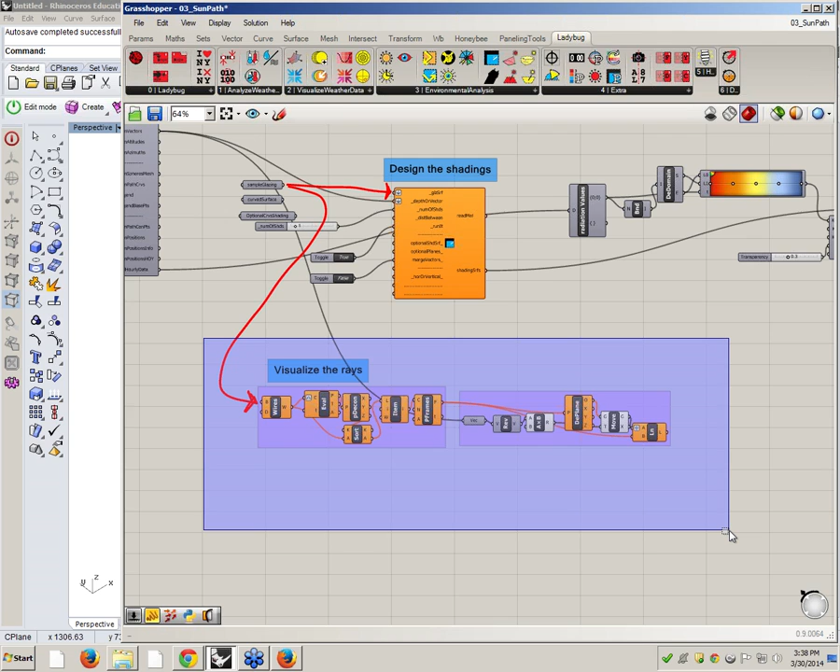Let's talk a little bit more about SunPath. So what I realize actually now is this thing is previewed on. Select all these visualize the rays, all these components here. Is everybody following? If you couldn't do it, that's fine. We will do it together, and then you will have another one to do.

So select all this, right click, and preview off. Right click, preview off. And don't right click on one of the components, it will just preview off for that component. So when you select, just right click somewhere on the canvas.

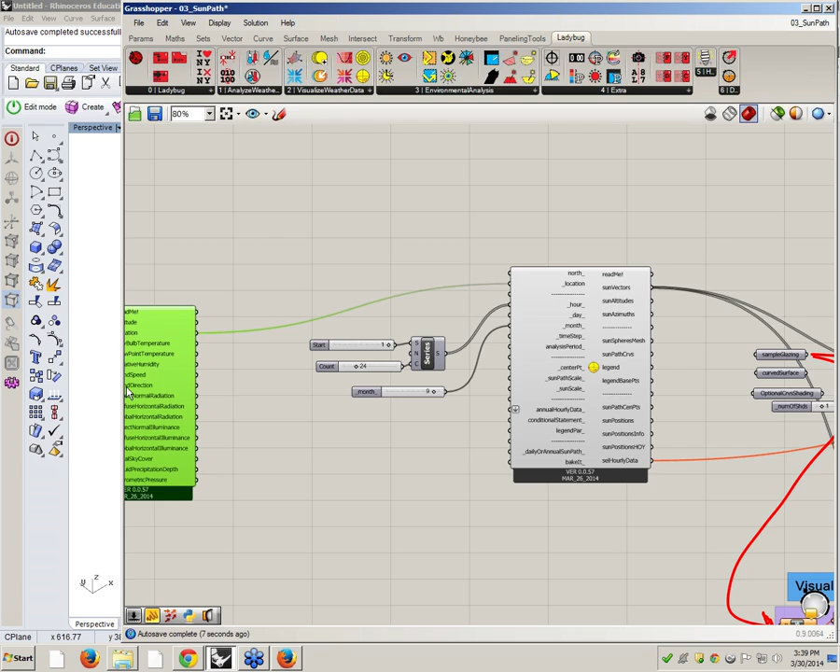So let me go and select my weather file, set one file. Where should I go this time? NREL. Okay, so I have the weather data. I disconnect this for now. So first of all, I want to see what I have. I right click here and I preview on. I turn on the preview for the SunPath. There should be a SunPath somewhere.

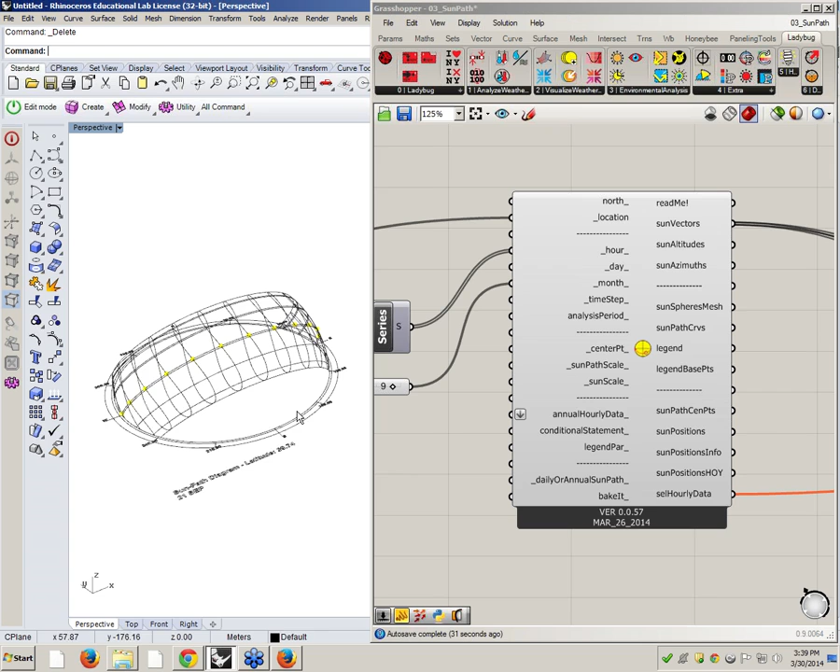I right click, I click the middle click and then I do zoom. And for some reason it doesn't work here, which it should. So now I can see my SunPath. Let's talk about SunPath. So this is an annual SunPath I have here, which basically means every line is for a single hour, and these lines are the 21st of different months.

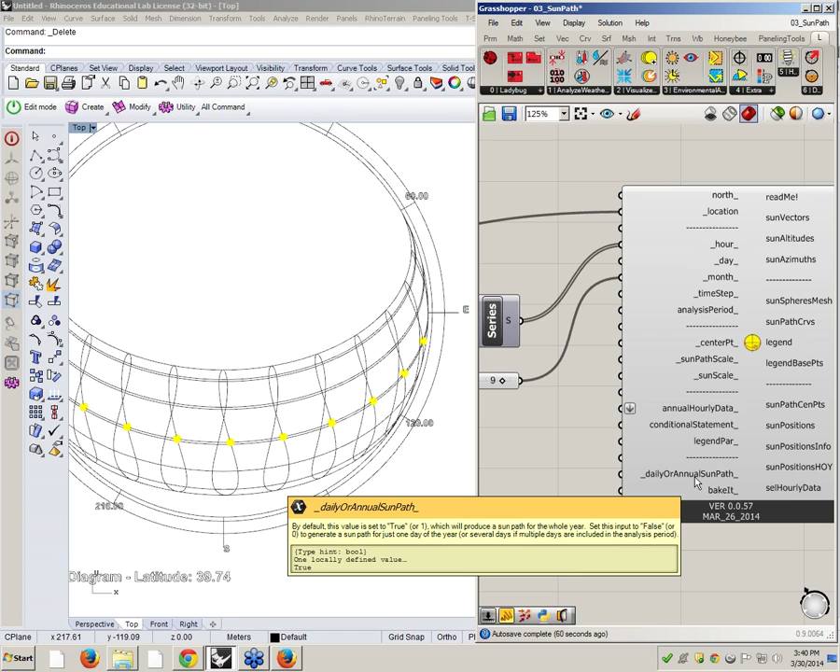If you want, there is an input here for daily or annual SunPath. When you set this to true, which I think is the default, it shows you the annual. But if you set this to false, if you bring a Boolean toggle, let's see if it crashes, because it crashed for you, Rami, right? Okay, it doesn't. So this is a daily SunPath.

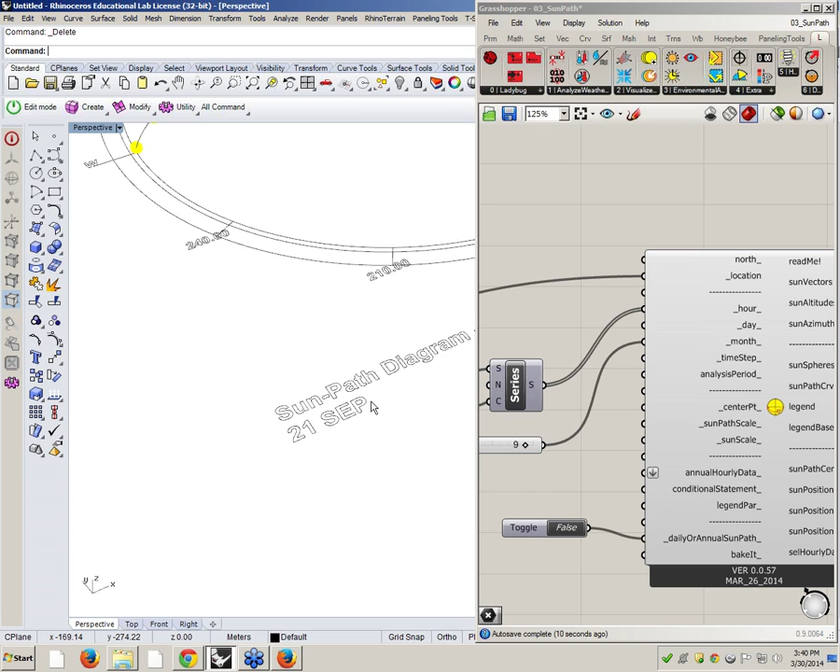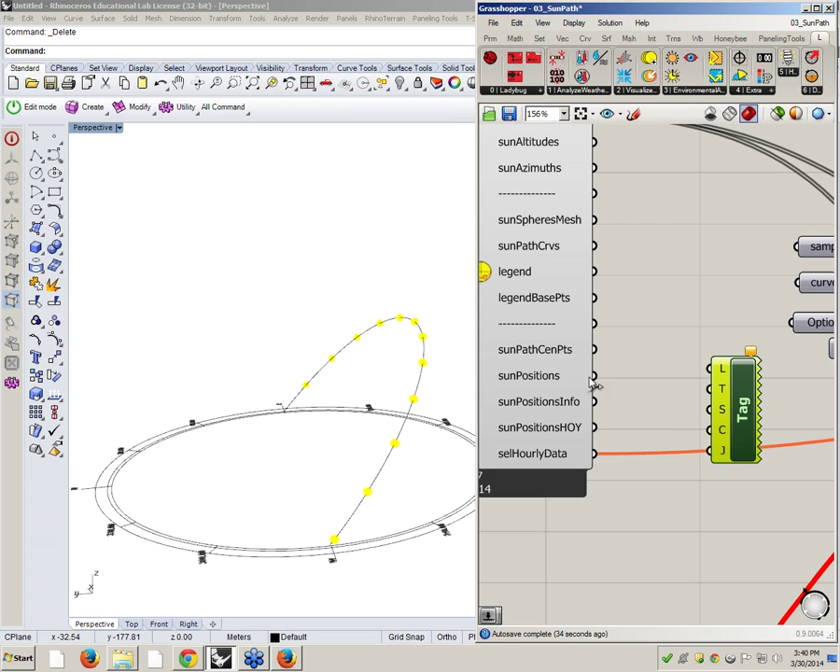This is the 21st of whatever, we should be able to read it here, 21st of September. And these are the sun positions on the 21st of September. And I already showed you how you understand which one is what. You have sun position information. So I can use this information. I can bring Tag 3D. And then I can do sun positions for the location and the information here.

And then I can't see anything because they're so small. So I just change the scale. And here we go. And I showed you how you can project this thing to camera, so we are not going to do that. So now, watch here. If I change the month, I zoom out a little bit. So for every month, it goes to the 21st of that month. You see the sun goes all the way up and then it comes down.

December. It's not like January, February, March, April, May, right? I think all designers want the SunPath actually to dance, but it doesn't. So it doesn't help you that much for randomness. It just goes all the way up, and it comes down, right?

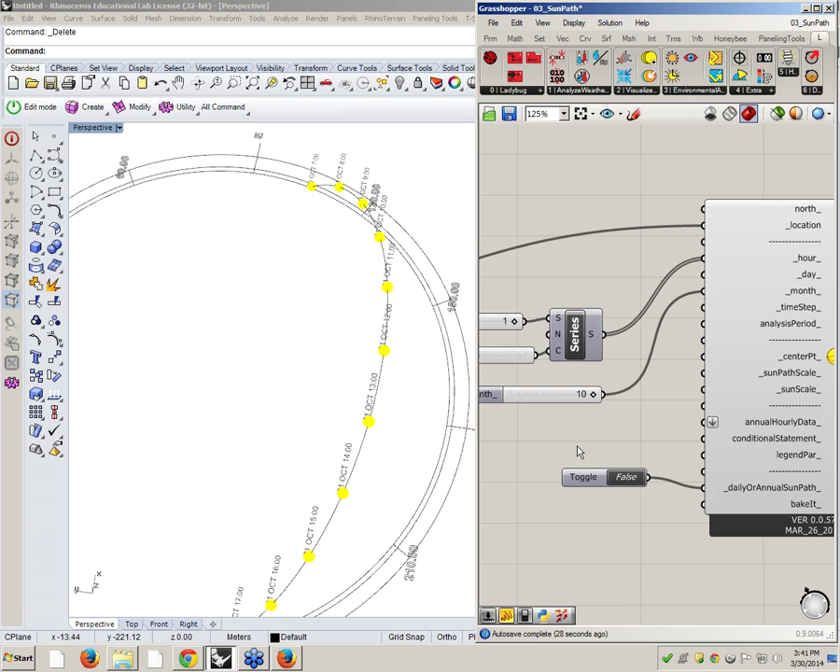So what we were seeing before, if I disconnect this, was all these days, the 21st of every month, and then these lines are representing a single hour. This represents hour 1, right? This one is hour 2, where the sun is at hour 2 for every month. So this is how you read the SunPath, first of all.

Then what I asked you to do was to generate the sun positions for all the months. Right now I have only a single month because the input for the month is only a single number, which is 10. So what we need is a series of numbers. You can bring a panel and start typing 1, 2, 3, 4, 5, 6, 7, up to 12, which is not that painful to type. But if you have 100 numbers, you don't want to do that.

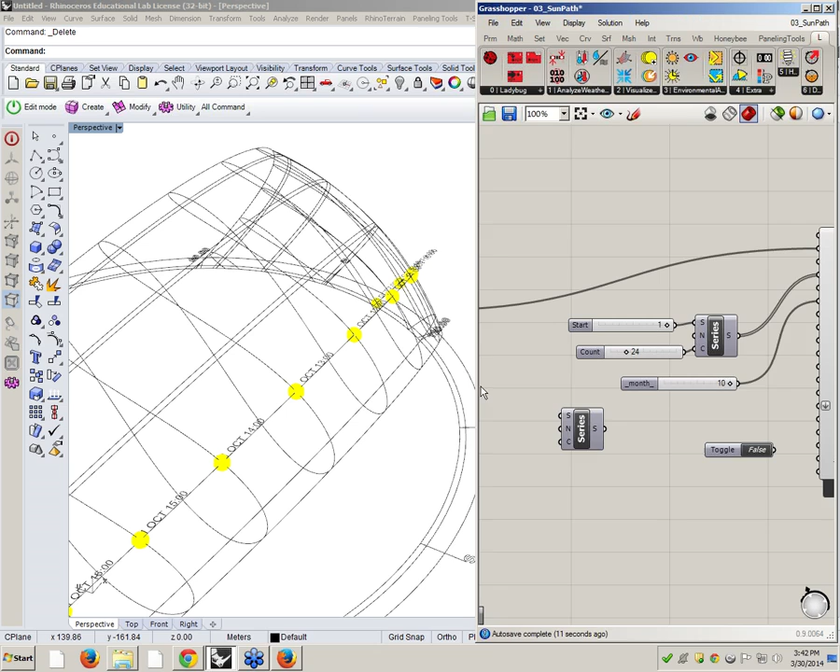So there's a component for that called Series. This component generates a series. What Series does, again, I bring a panel, I connect it here. It generates a series of numbers from the start, which is 0 in this case, with a step of 1, and for 10 values, right? 10 counts. So now I want to generate numbers from 1 to 24.

Sorry, for the month I want to generate from 1 to 12. So for the start, I want this to be 1. I just right click and type 1 here. It's totally fine if you want to make a 1 and connect it here. Just check the output, it will stay the same. Or you can bring a slider and set it to 1. No difference.

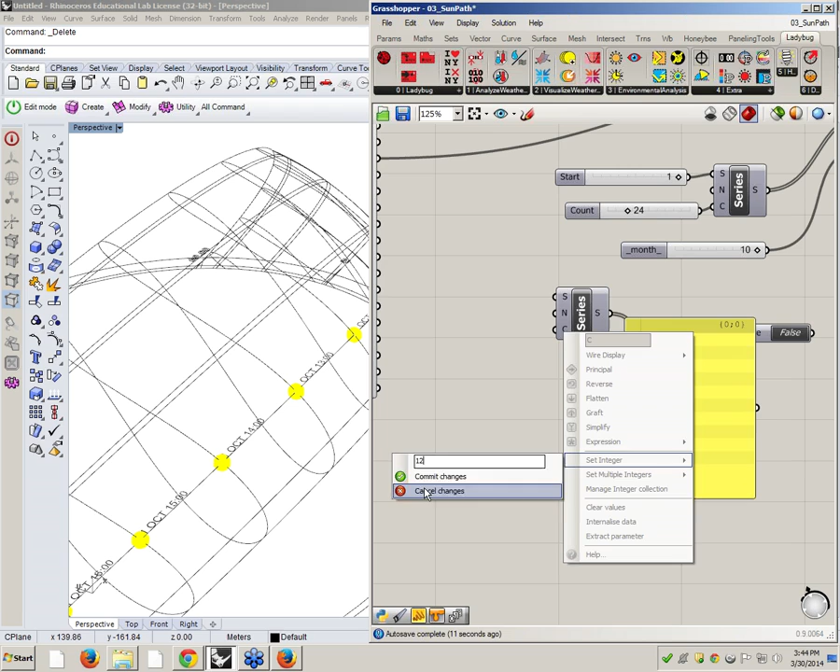So delete, delete. And then n is 1. I'm fine with that because I want it for every month. The only thing I want here is I want it for 12 months. So it gives me numbers from 1 to 12. So now if I input this as the month instead of this 10, boom, I get it for all the months.

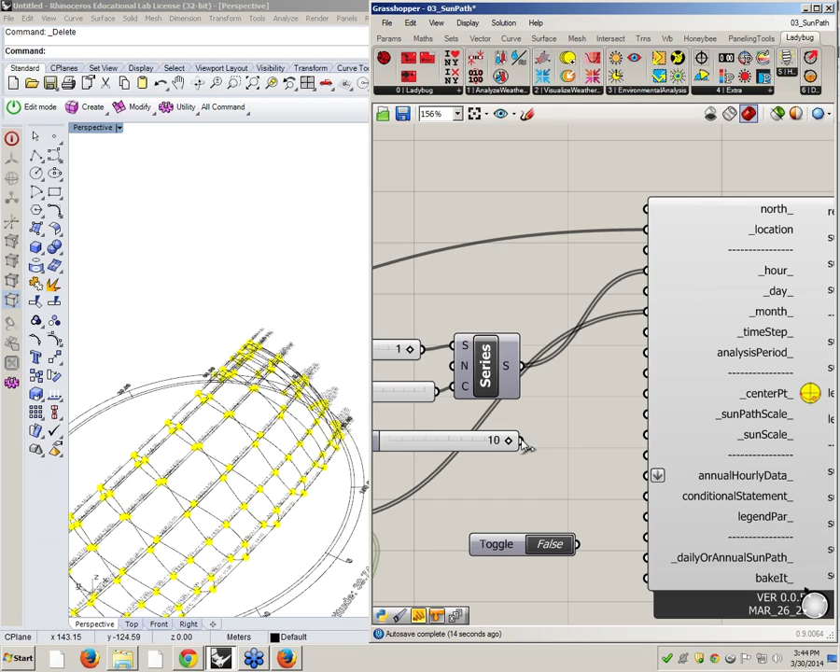Is it clear what happened? So the component goes for every hour that I ask for, and every month that I ask for, and every day that I ask for. If I just put a single hour, like 10, you will see it will show me the sun positions for this hour during the year for all the months. It's up to you, based on your problem, what do you want to get out of it. So for now, we decided to generate it for 21st of each month.

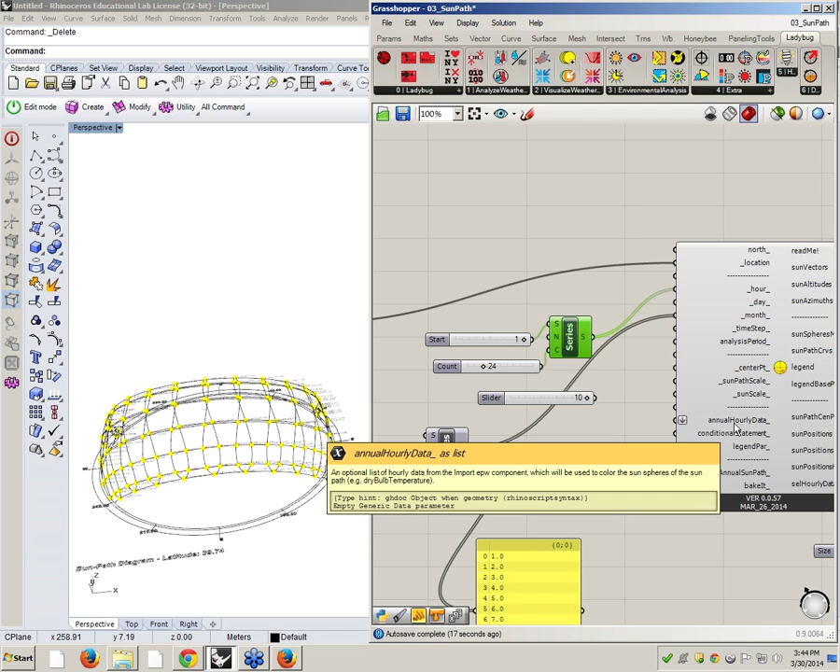And then the next thing that I asked you to do was to put the data that we need, because we want to design a shading, right? So we want temperature and radiation. You go here, you find dry bulb temperature, you just connect it here to annual hourly data, and now you get the temperature values mapped, and then you select global horizontal radiation. You have this thing mapped, and I zoom out, and I see I'll have all this data on top of the sunpath. So now if I write my conditional statement, I should be fine, right?

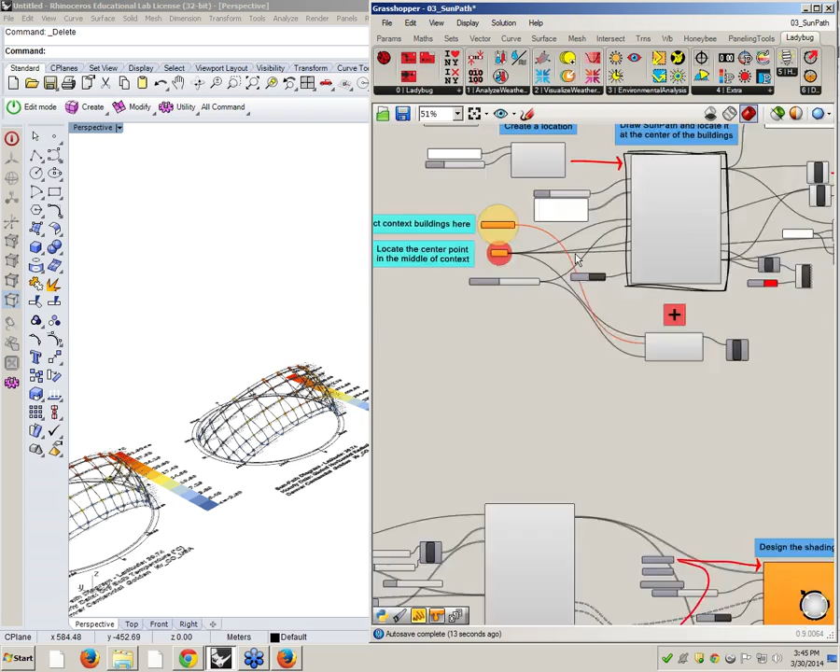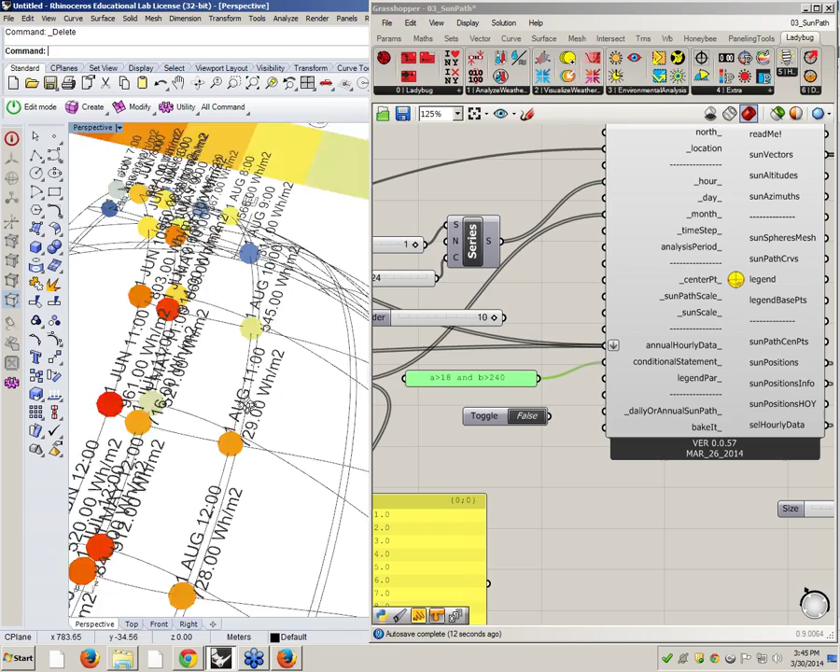So you know, now you can go and say, okay, this is the months of August, June, July, and check the average. See, okay, during the afternoon it's kind of cooler than 18. It's more than just a graph. Really, it can help you to understand what's happening in that area, just looking at the sunpath and having the data connected.

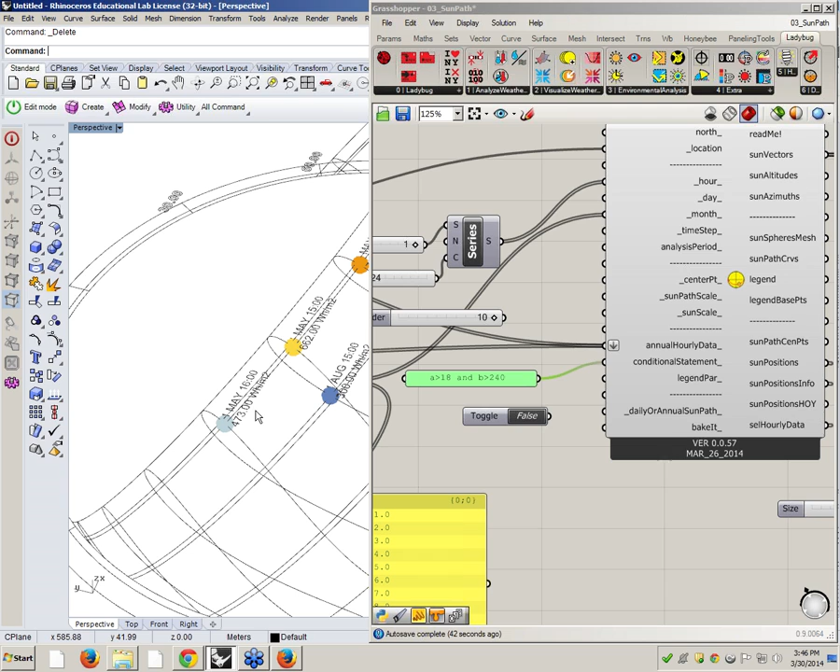At the same time, I said something that I could be 100% wrong, and nobody told me I'm wrong. I take it as because you guys are polite. But this is how easy you can read something wrong. I said A bigger than 18 and B bigger than 240. Maybe it's because of radiation and it's not because of temperature, right? Because I'm calling the values for both of these graphs, and I say A and B. So it will show me the situation when the temperature is more than 18.

Oh, I'm wrong. So it should satisfy both. I was right. Okay. Confused? Sorry. Hopefully I didn't get you guys confused. Yeah, so it satisfies both. So here we get more radiation than 240 and the temperature is more than 18. This is and, not or.

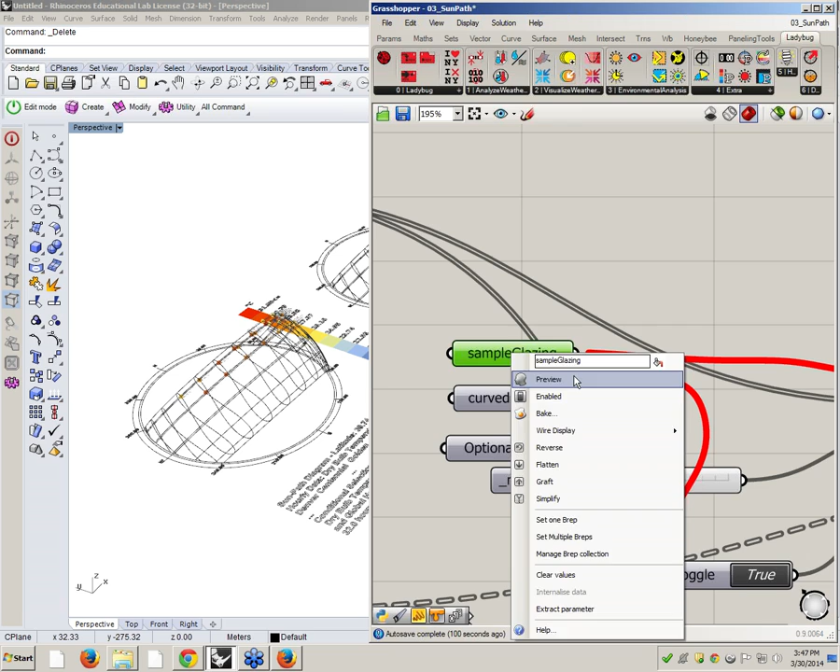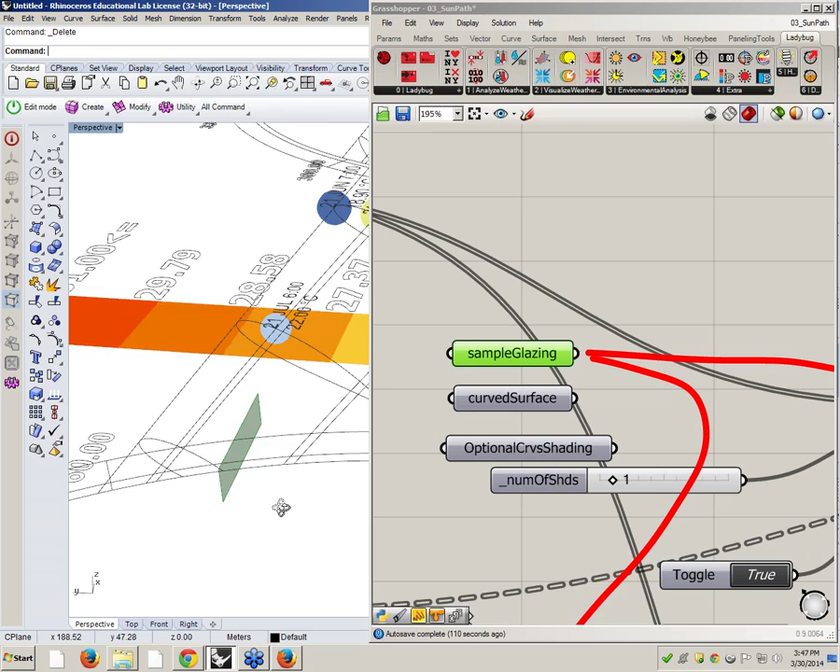So now we have sun positions, we can design a shading. If you look here, I have a sample glazing for you. Turn the preview on. There's a glazing somewhere. You see this? It's next to your sunpath. Here. And I internalized this glazing. We don't need to move your sunpath here because you're using vector. That's why vector is useful to design a shading.

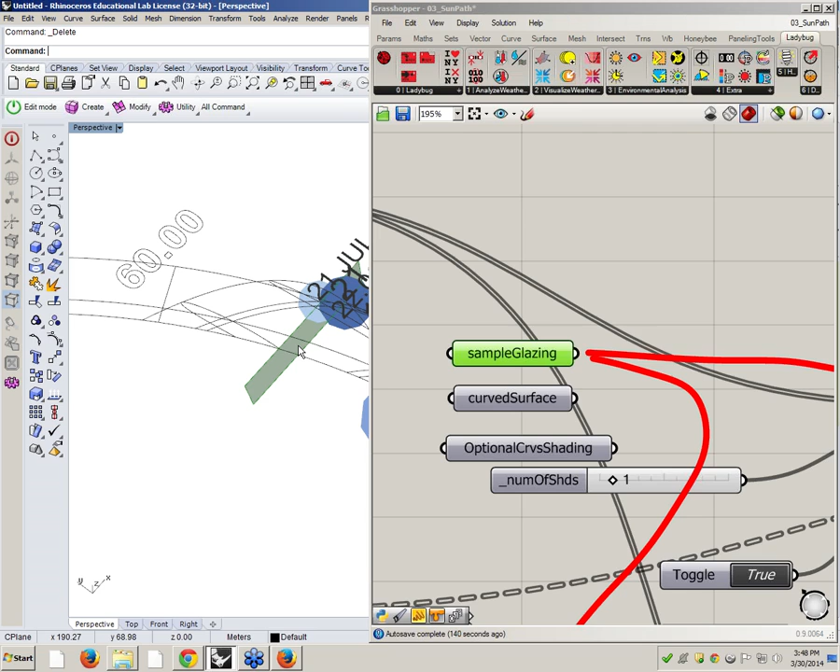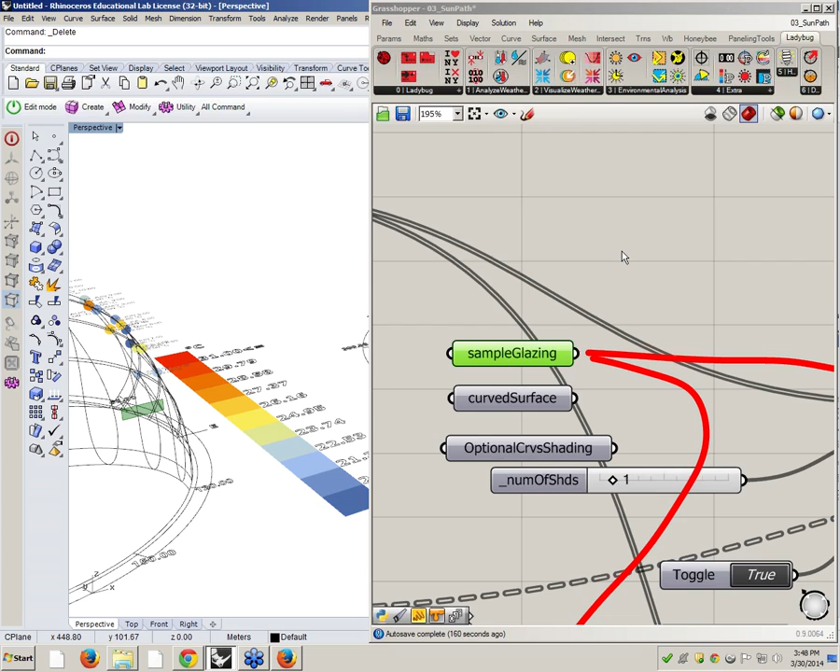What we want to do is design a shading for this sample glazing. But just for the sake of presentation, if you want to present to someone or yourself, you want to move this sunpath to be in the center of this sample glazing. How you do that is... Do you know what to use to get the center? You should remember. We used it last time. Okay, that's one way. But just use this geometry to find the center. I don't want you to draw the point in Rhino. I want to do something with this geometry to find the center.

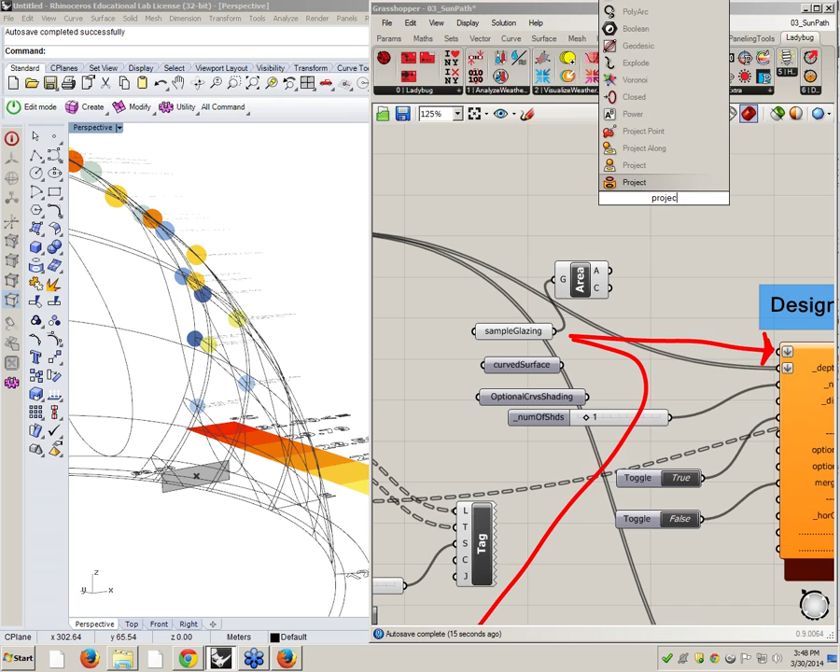Area. So the area component returns center. If I do area, it will return the center point of this geometry to me, right? And then I don't want it to be here. I want it to be projected to XY. So there is a component, project. If you type project, there is project to plane. This one, the second one. It will project an object to a plane, and the plane by default is XY. So just connect the center to this geometry, and you can see this point.

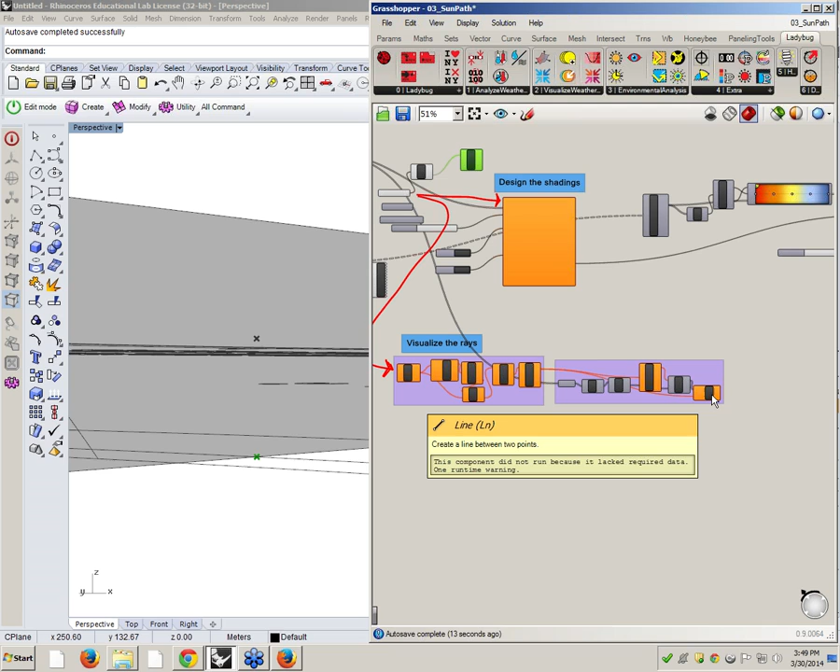What is the question? Because you didn't turn off this, right? Did you turn off the preview of this? Right click and preview off this.

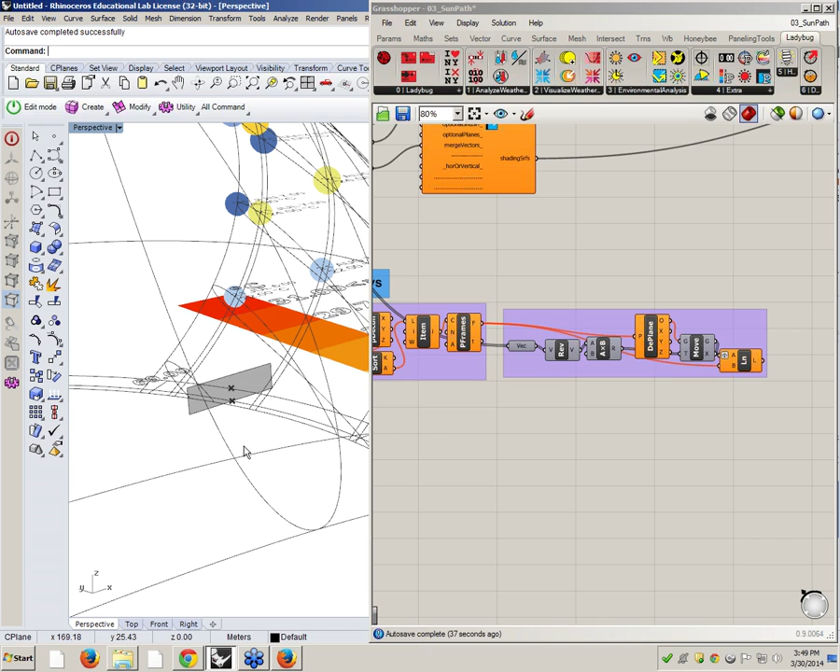Is it fine? No? Let me help you for a second. So now go ahead and try to move the sunpath here to center of this.

So you have this point, here's the point component, here's your sunpath component. Find a way to move this sunpath using this point while I'm helping your friend. What you need to do is use the geometry here, which is the new point, and connect it to the center point. So it will move the sunpath here.

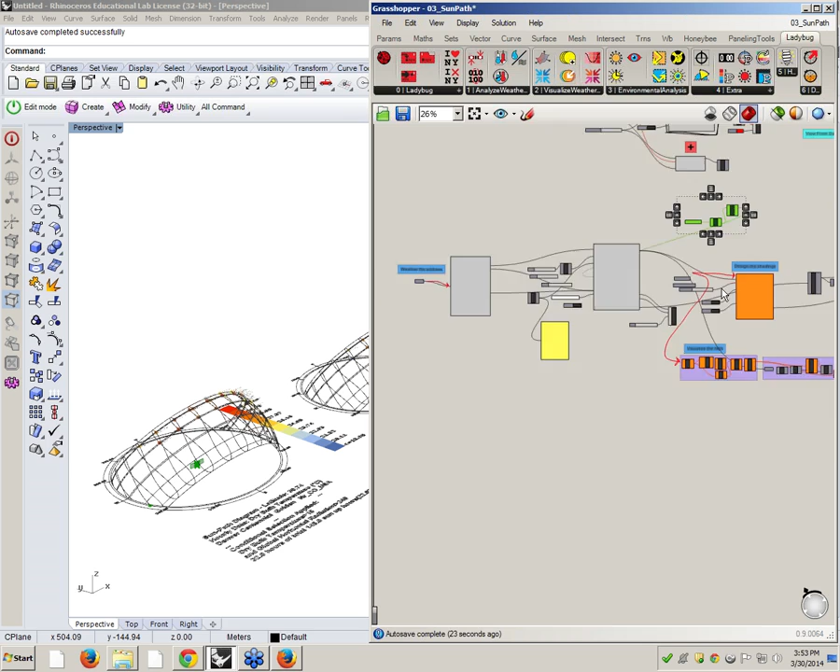I can hear probably multiple people watching this will say this is not the best way to use Grasshopper. In Grasshopper, you always want to have the data flow coming from left to right, and you want to keep your components similar. So you usually don't do something like this. It doesn't change what really happens in the component, but it doesn't look right.

So I just moved these things here. Now you see my sun path is located in the right place, and this one has nothing, right? So it comes to the point where, okay, I want to do a presentation and I don't want to have this one show up, but I still want the data to be connected.

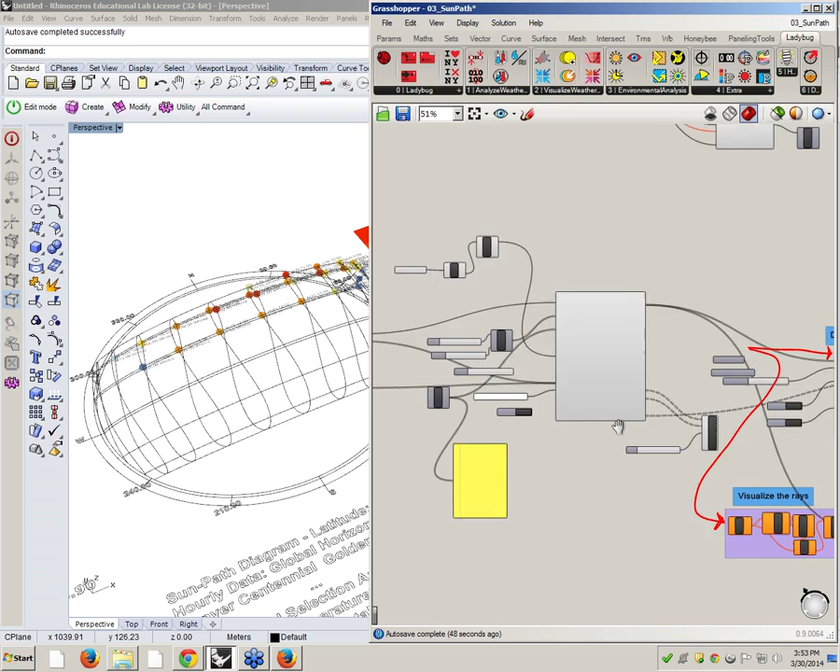Hopefully I'm not going to lose you here, but oh, I forgot to put this thing. Hopefully they could hear me. But how you can do it, if you check the outputs of these components, they're all branched into two different branches. You see it's 0 and 1, the outputs.

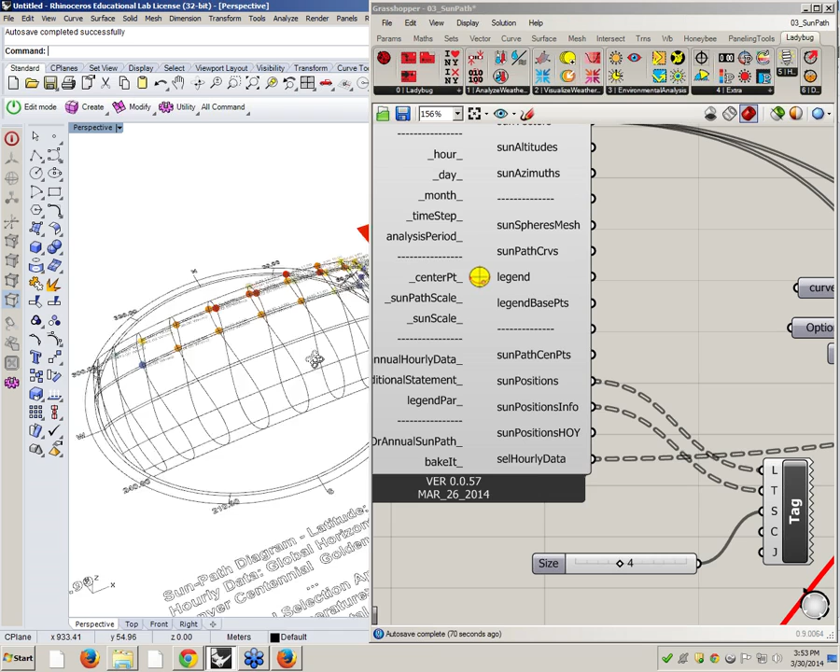So the outputs of sun path position are 0 and 1. 0 represents the first sun path, and 1 represents the second sun path.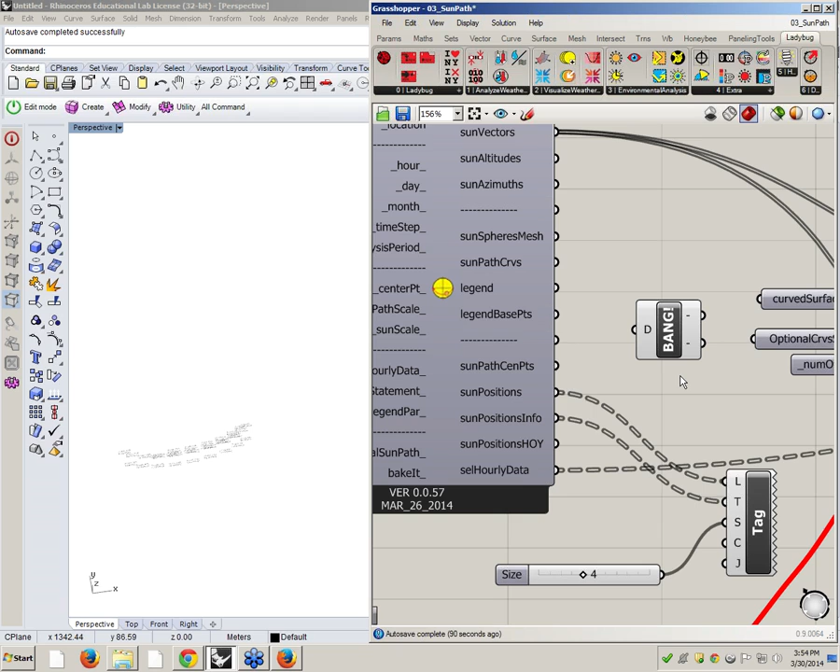To do that, what you have to do is preview off your sun path, and then use a component called bang. Bang, just type bang, it's explode tree. So it will bang the data tree.

Basically, it will output every single branch in a different output. Or you can select — I like bang because I think it's really simple to work with. But if you want, you can also use select branch.

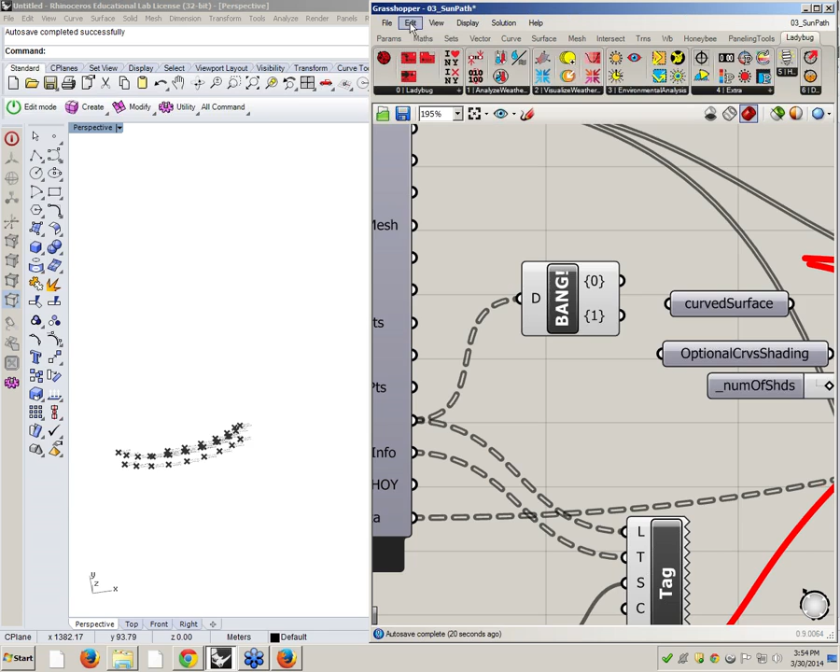So there is a select branch component which is here. If you go in sets, tree branch — okay, it's not select, it's tree branch, you can do the same thing. You can connect a tree here, but I assume many of you don't know what a tree is.

So you can connect a tree and pass 0 here. It will give you the first sun path. But for now, let's just use bang because it's easier.

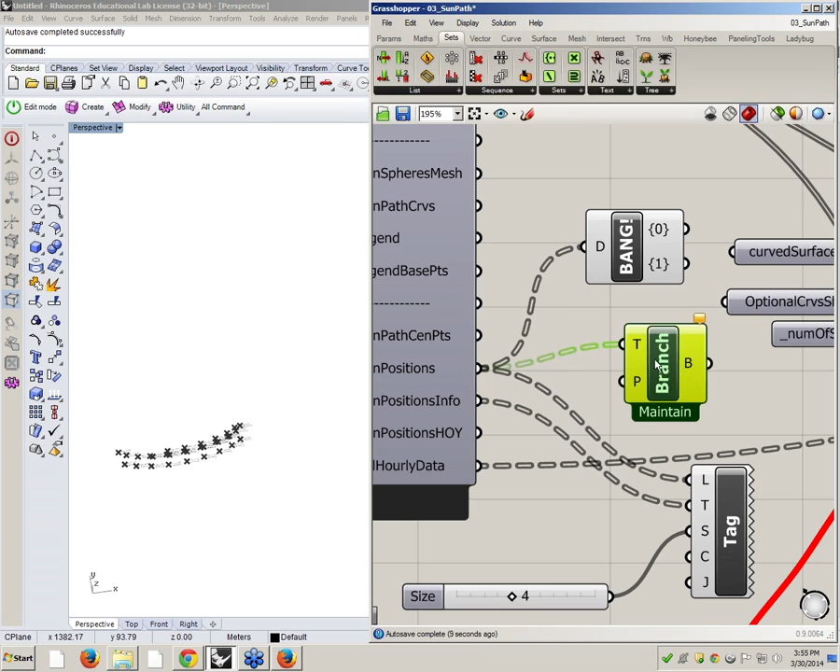I select bang and then zoom in and press minus here. Remove the 1. It will give you a warning, but don't listen to it.

So what I did now is I connected this output, which was my sun positions. You see, it only gives me the outputs for this sun path and not the second one, because I'm only visualizing branch 0.

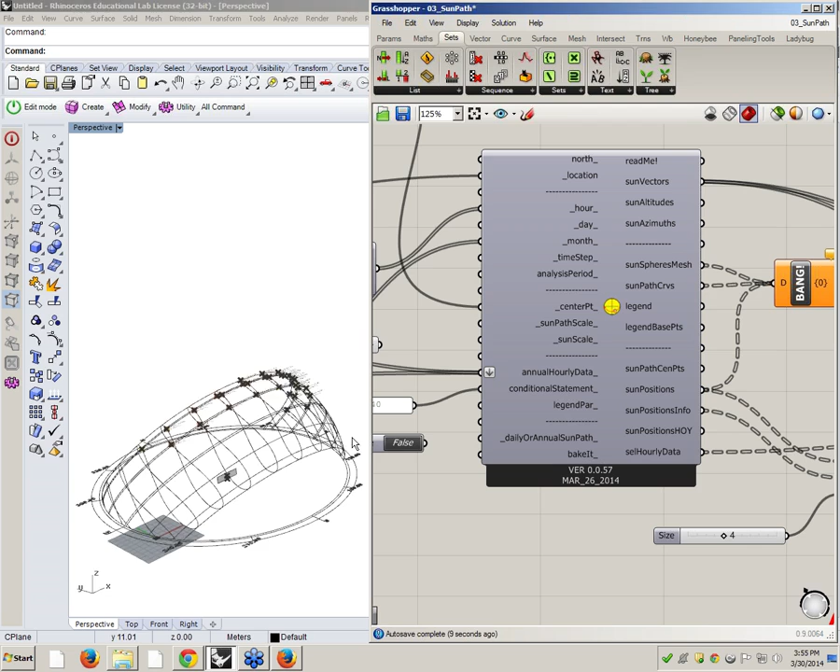So I can do the same thing with everything, like sun spheres mesh. I can do the same thing here. I can do the curves here — I'm zooming to the wrong place. So now I get what I want out of the sun path, and the other one doesn't show everything, but it still shows this one because the data is connected.

So I can do the same bang thing. I just copy paste the bang. I connect the locations.

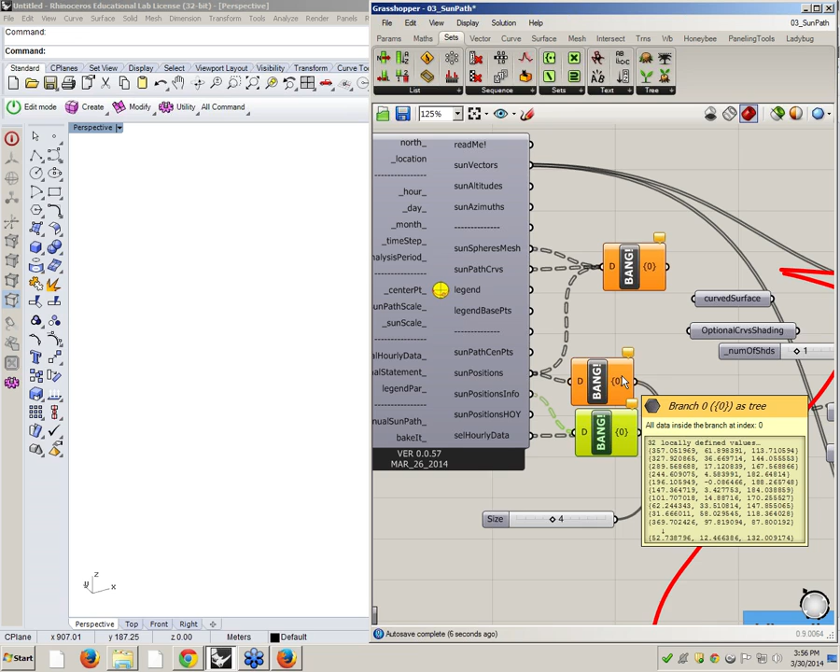So all I did, there were 2 branches coming out of my sun path. I only wanted the first branch, and I used bang to do that. As I showed, there are different ways to do it, it's not only bang.

You zoom in, and yours was like this, you just press minus.

So we did bang it. We did put the sun path in the right position. Everything looks good, everyone is following.

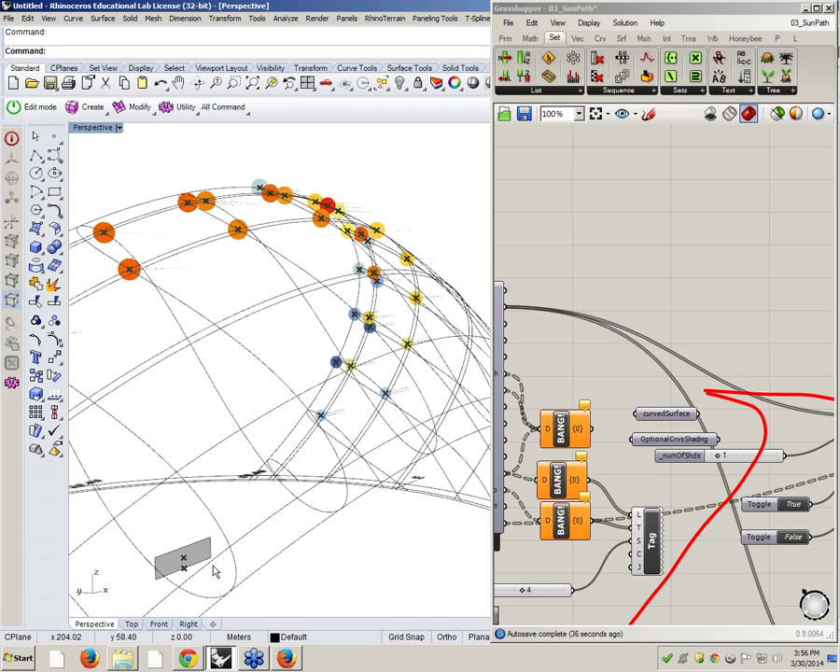The second bang — I just copy pasted, Control C, Control V, and then I connected the sun positions, because for this one, for the text tag, I needed it.

For these ones I don't really care because I only want to preview. So I just connected everything here. I previewed off this, and I connected everything here.

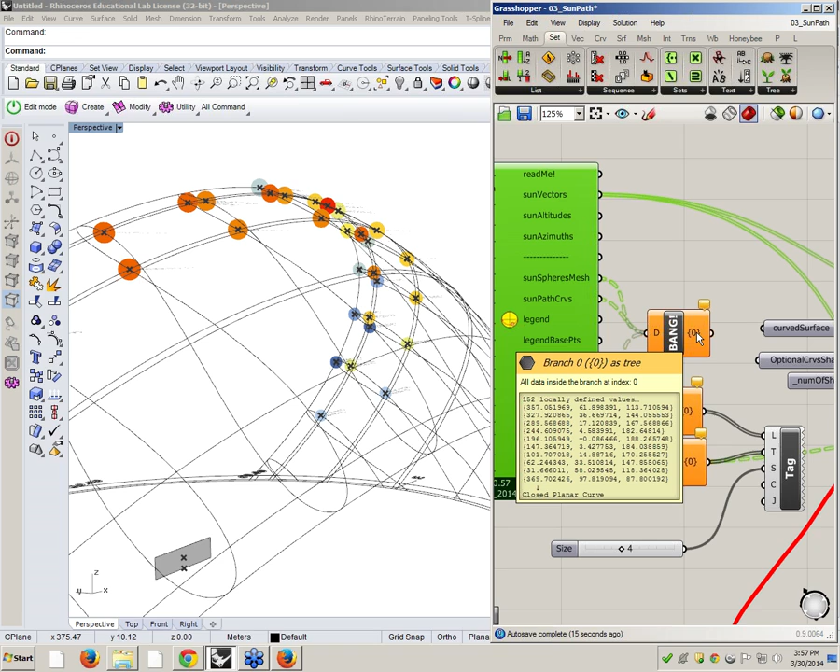And I'm only selecting one branch, so it only visualizes that branch. But for these ones, because I want to use them later, I want the data to be separated. The output of this is now a bunch of stuff, it's a mess. But here I want to have the clean flow of data.

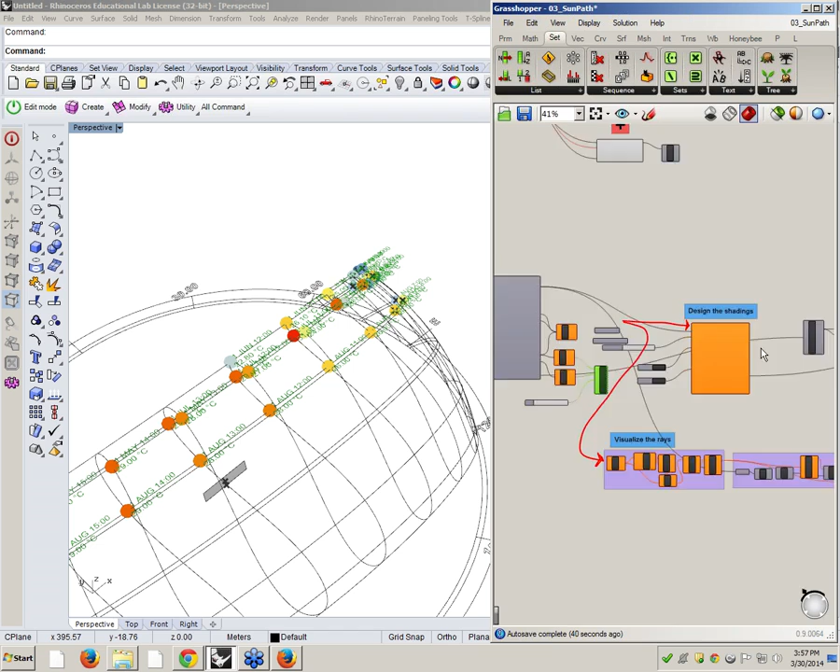Now I did this, I did that. There is a component here which is the shading designer, design shading. There are minor bugs still in this component, but it works fine for simple cases.

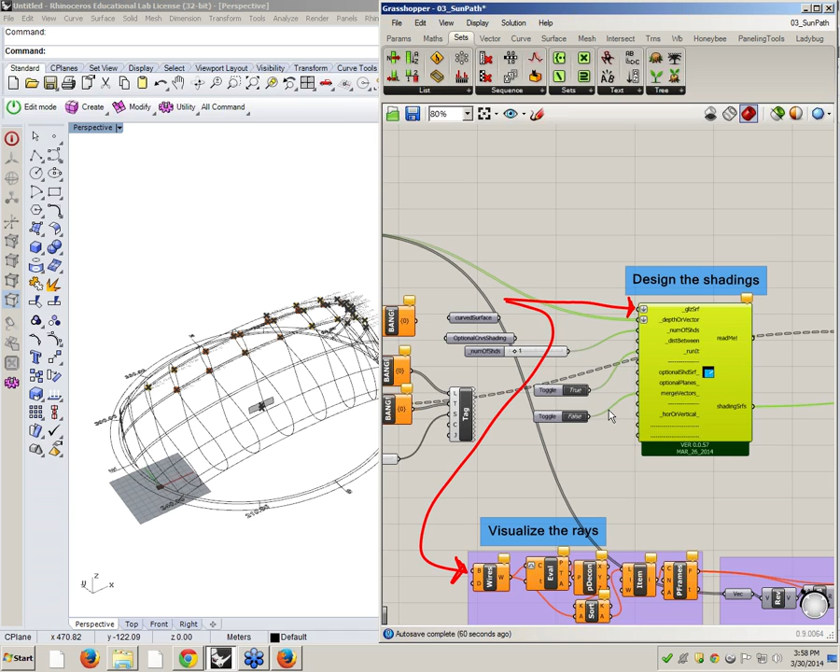Let's talk about this component. It can do so much, but right now I don't think we can cover everything because we won't have any time to run any analysis then. So what you need to design your shading is basically the surface that you want to design shading for, and then the vectors that you want to protect from. Does it make sense? This is all you need.

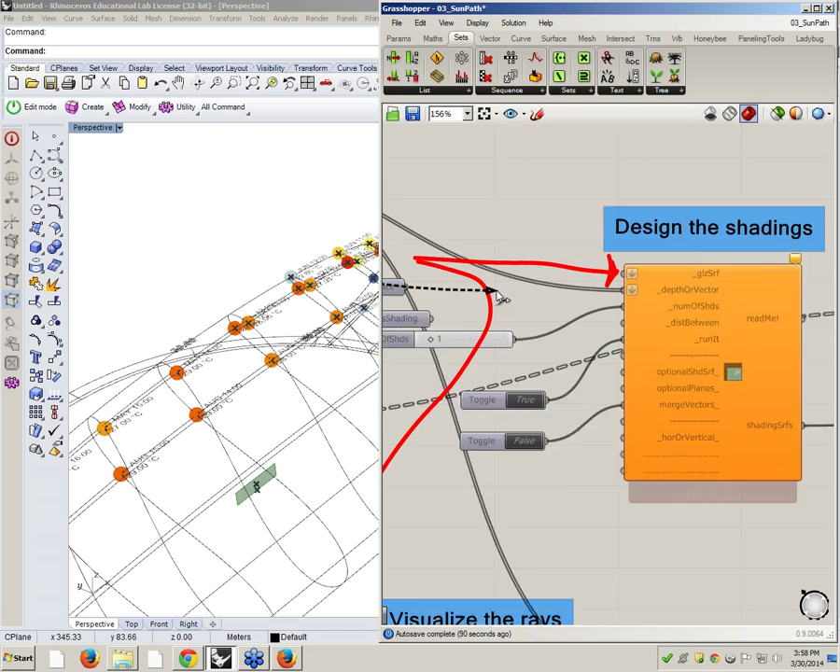So I have my vectors, and I didn't go to read all the data that we mentioned. We just filtered it here, so it gave me the vector. So all I need is to connect my glazing. Wherever your glazing is, just drag that and connect it to the input of glazing surface. So wherever your glazing is, sample glazing is, get this thing and connect it here.

And boom. It should give you so many surfaces. For each single vector that you have, it gives you a single surface. And then you see they're colored. The colors represent how much radiation you're blocking with every single vector.

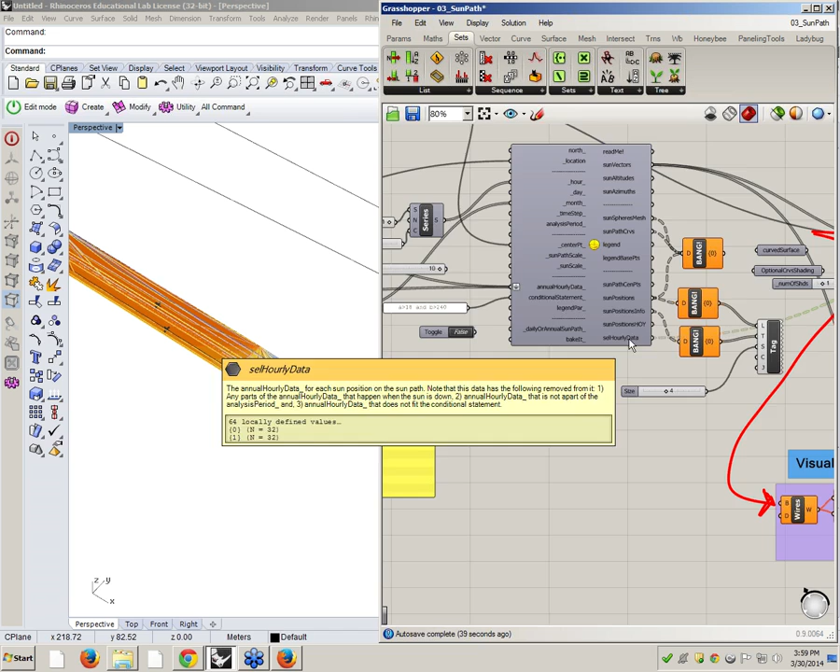So this is, the data is connected. So what I did is basically I used the output, which is shading surfaces, and from here I have the radiation data coming out of my selected hourly data, right? And then similar to what I showed you last time, I'm generating colors based on these values, and I put them on my shadings. What is the use of this?

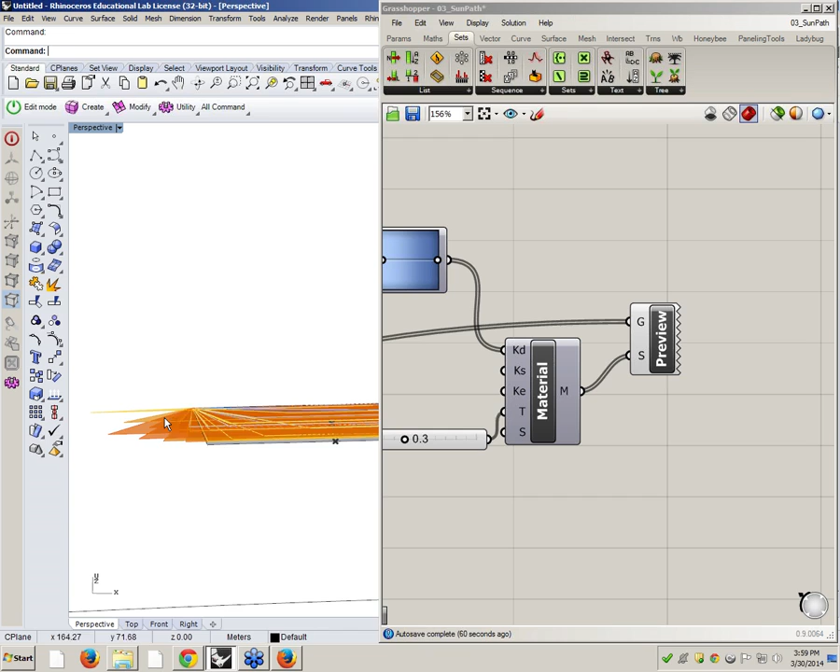I can just watch and say, oh my goodness, this shading is so long, but it's not the most critical part of my shading, right? Because it doesn't block the highest values. Or I can zoom out a little bit and I say, okay, if I want to be really only blocking the critical values, this is the area I really want to block.

Can you see the value of having the data connected to the geometry all the way? And this is really critical that you guys understand the data. You will have these examples, and this week until next week you have to go and do it yourself, and probably you will make some mistakes - how to get the data and geometries passed together. I'm taking care of data trees in many places and we don't talk about it, which probably you won't.

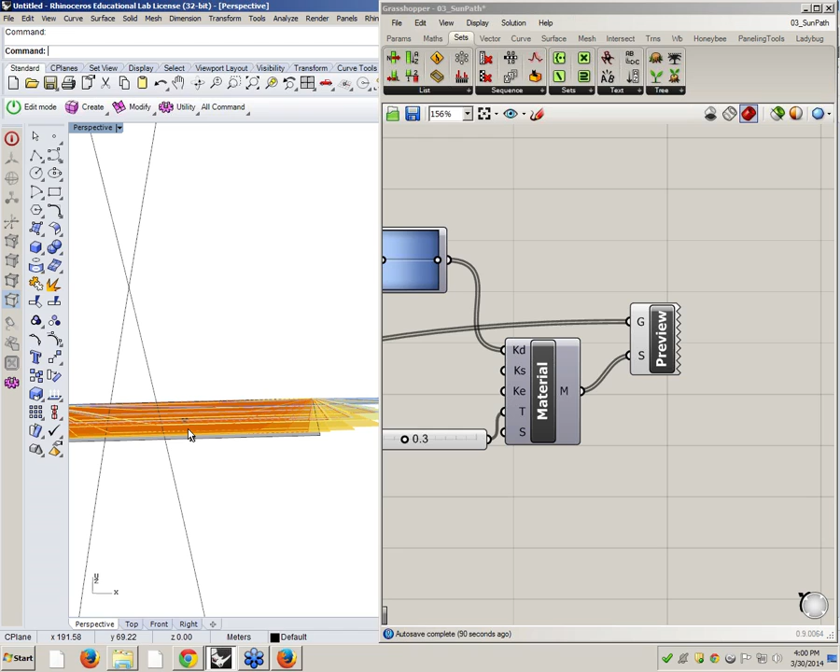And you will get like all the shadings blue. Sometimes you get everything red, you know. Then you play with it until you figure it out.

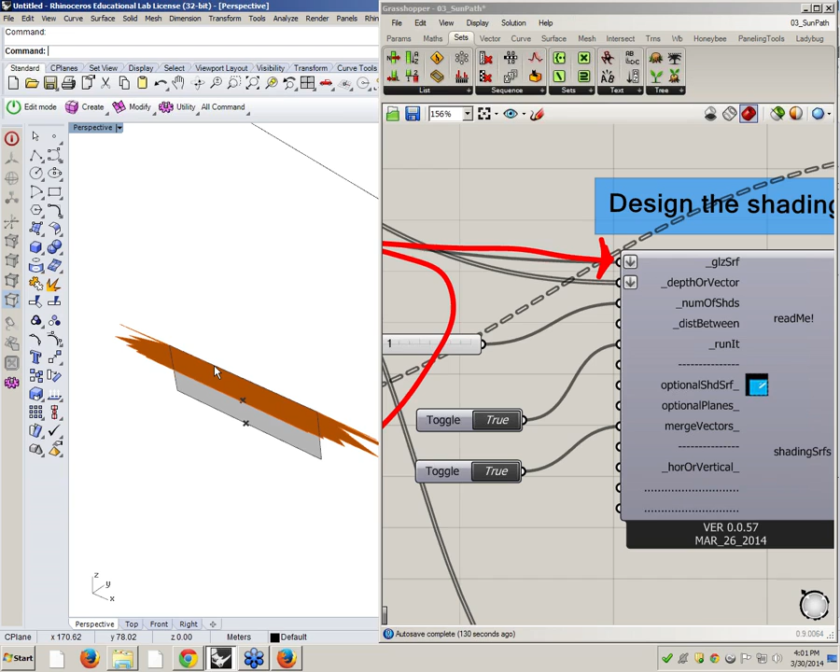For some of you, it may not merge the surface, which means the merging fails. And if the merging fails, it will tell you in the readme that the merging failed, but you have the surfaces, so merge it yourself. Because merging and all that stuff in Grasshopper could be tricky based on the tolerance number and all that. So maybe sometimes it fails. So I want to give you the surface as the output so you can do it yourself in Grasshopper.

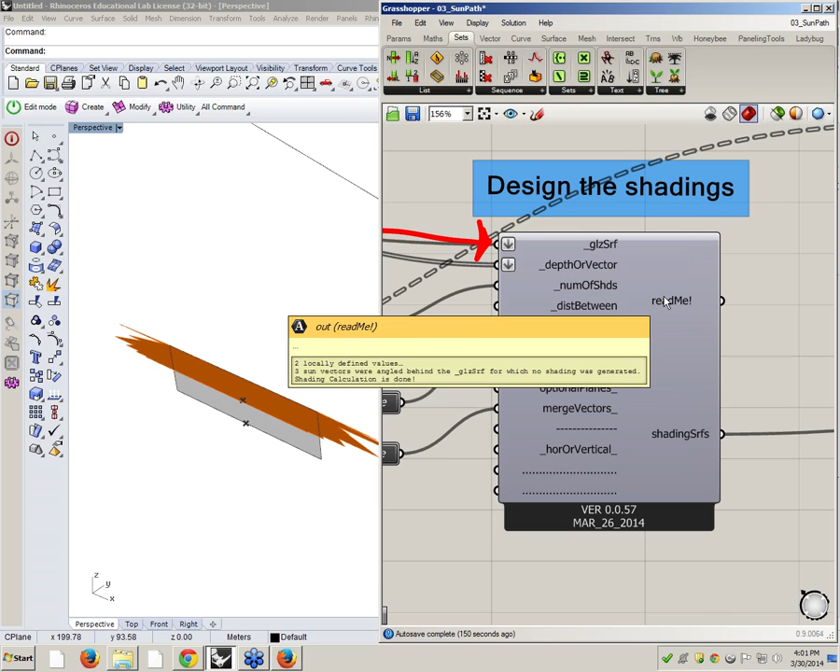One more thing that you can do is, okay, this was cool kind of, but you know what? I don't want to have a horizontal shading and I don't want to have one. Let's first talk about that. So you have an input here for the number of shading and it was 1. You can start changing this, 2, 3, you see? So it will design the shading for you based on the number of shadings that you want.

And as you see now, it has started to give me the wrong colors.

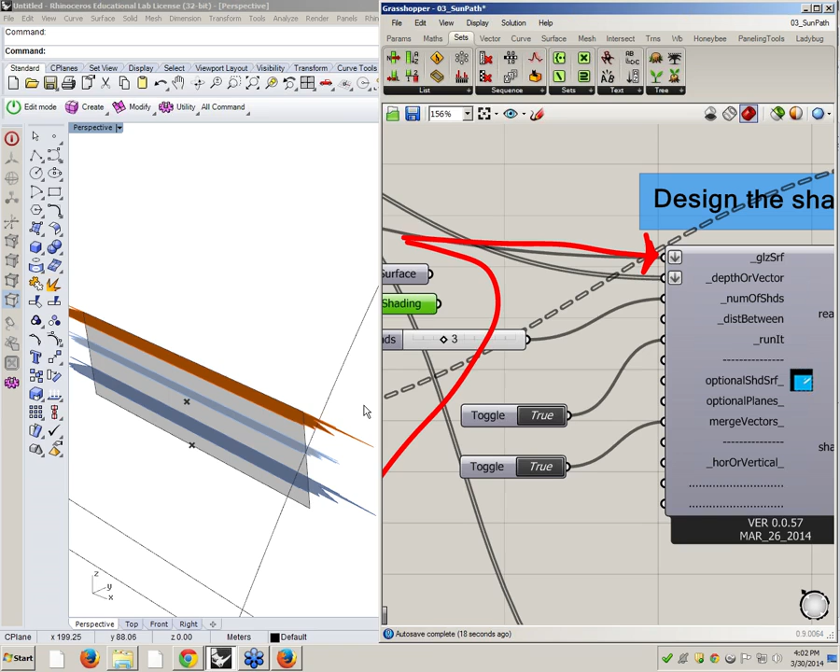Because now the data doesn't follow - this is not something I want to solve here, but I'm just showing you it can be really wrong. Does it make sense? I'm changing the number of shadings.

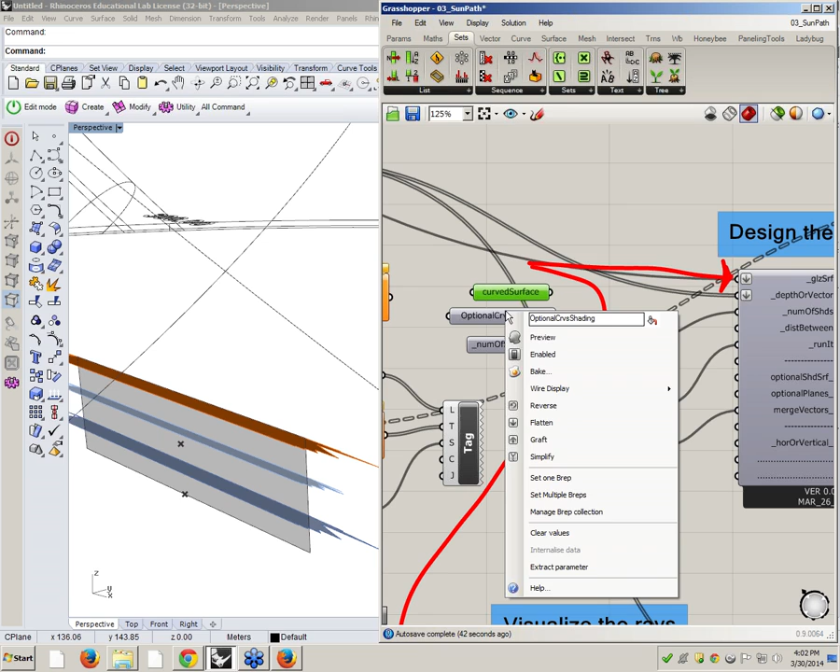Instead of changing the number of shadings, you can change the distance between shadings. That's possible too. But the last thing I want to show you about shading is, what if you want to have it on an optional surface, what I call it. So you want to do a design and say, I don't want horizontal shading - I have a surface already designed, and calculate the shading for me on this surface. So this is this optional curved surface.

Just right click and preview on, so you should be able to see it. So now if you connect this one to the optional shading surface here, it will redesign the shading, but it will design it on this surface for you, right? So don't get confused, there are multiple things here. So I selected the optional curved shading.

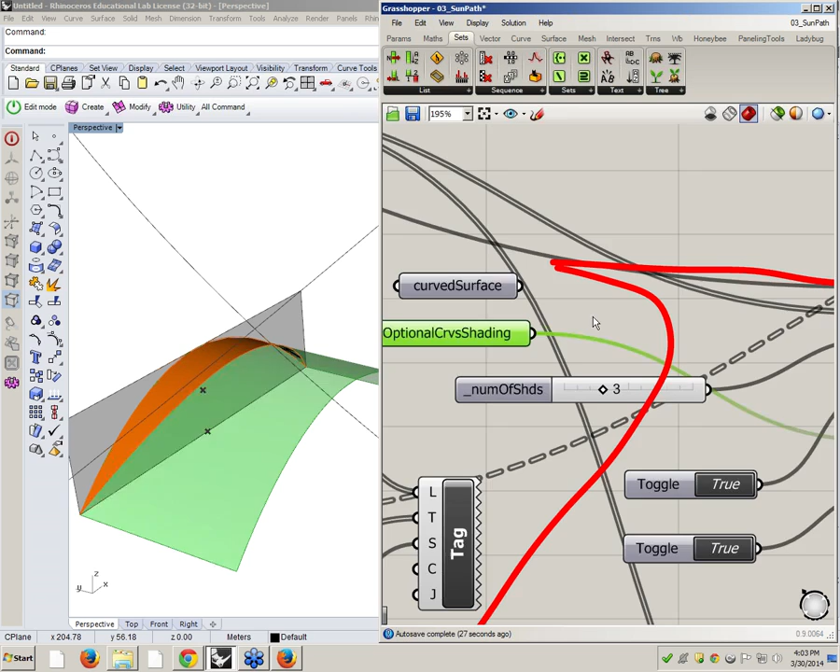And it happens like you have a wavy surface that you want to really work for you as the shading, and you want to cut that surface based on the sun vector. This gives you that ability. So what I did, I just connected the optional curved shadings to optional shading surface. And now you see my shading surface is this, based on my vectors.

The other thing you can do is, this surface shouldn't really only be a simple planar surface - it could be non-planar. So again, what I do here, I get rid of this optional shade surface, I disconnect this, so it gives me the normal shading.

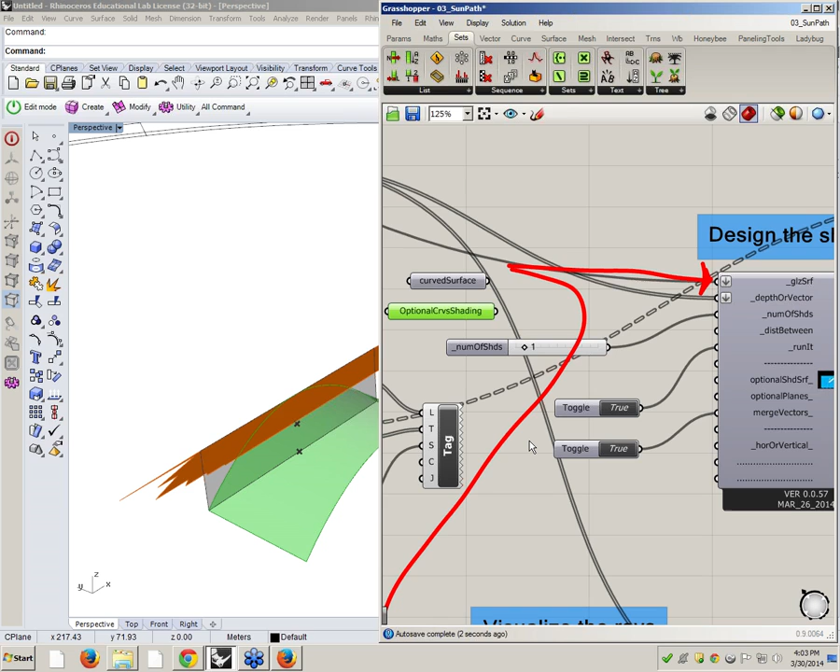I put this thing to number 1, so the number of shadings are going to be 1. I set the merge vectors to false because I want to see different shadings that I get for every single vector. And then I go ahead and connect this curved surface.

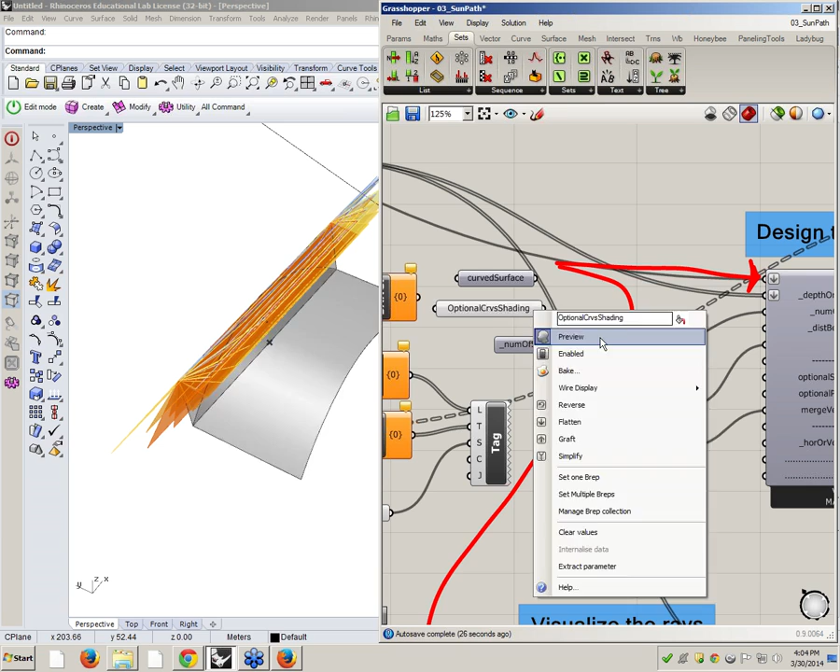If you preview off this one, if you preview off optional curve shading, right? Everybody follows? If you preview off this and preview on this, you will see there is a surface, like a curved surface in a curved building.

So you can connect this one as a glazing surface. Instead of the surface that we had before, I can just connect the new surface, which is a curved surface - it will do the same. You see, now it's designed the shadings for me, but it's for a curved surface. Make sense, everyone?

What, you got a red box? Sometimes, like I said, this is still a little bit buggy. So maybe based on your vector, if you want, just save that file and send it to me, I can take a look. But it usually works - sometimes you have to remove some of the vectors, all that stuff. Any questions?

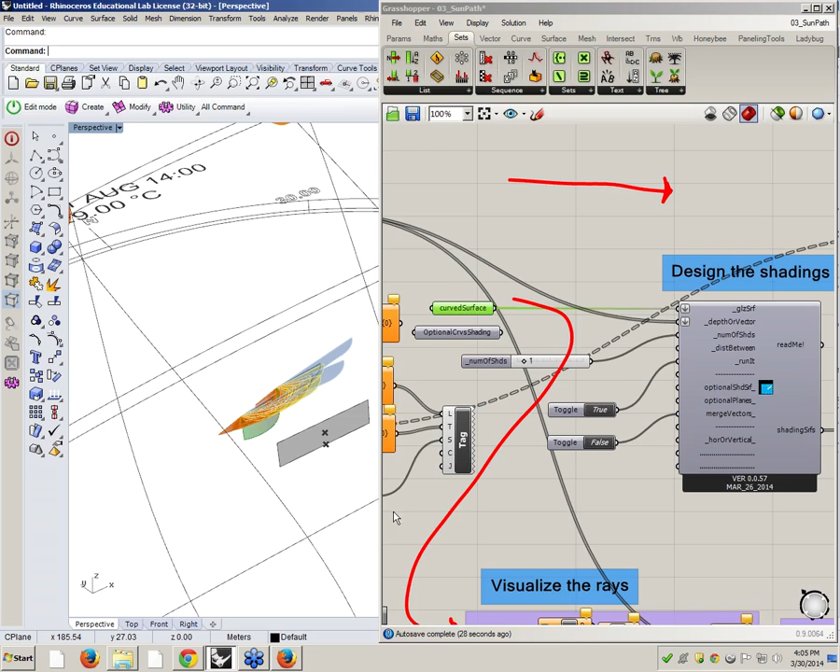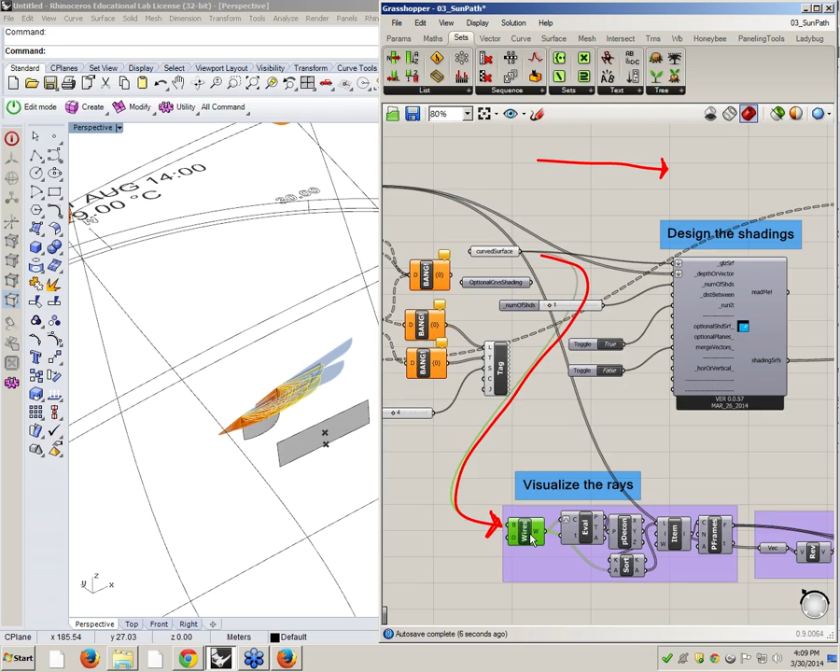Visualize the rays - so if you connect the surface that you're designing shading for, whatever is the input of your glazing surface, connect it to this B input here. Whatever you're using for generating the shading, connect it to the B input of this, and then go and turn on the preview. So now it shows you all the sun vectors that you get, sun lines.

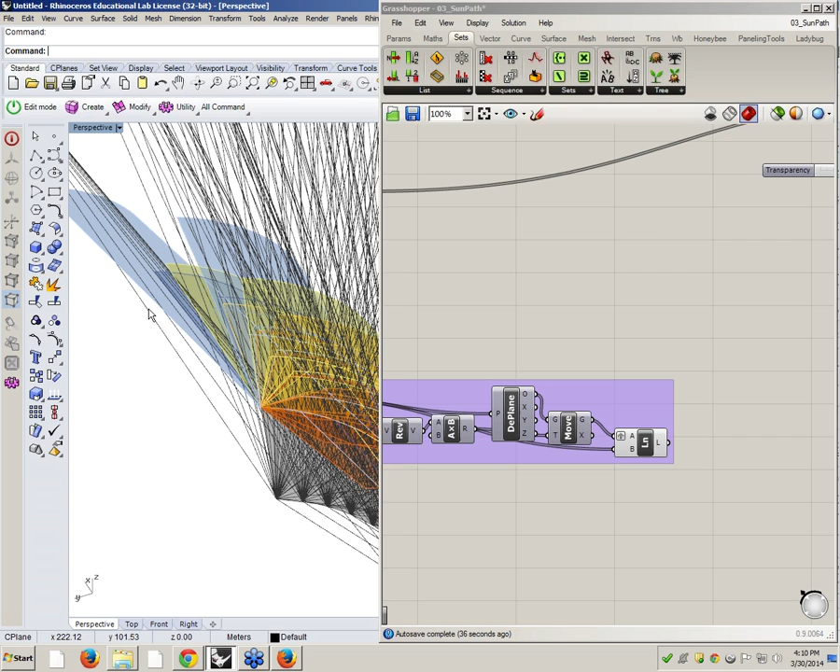And now you can see how the shading is actually designed. It basically solves all these intersections for you. And if you have a sun coming from backward, that's why your shading comes from backward. There are different ways to solve this - you can check the vectors and just get rid of the vectors which are behind your surface, all that stuff, which is not something the component takes care of right now. And you should do it, but probably for the next versions we will take care of that.

So now I go and select a simpler surface, connect a simpler surface here and connect a simpler surface here. So hopefully you can see what's happening. So you have these surfaces coming in, and every single shading is basically designed based on this vector. It comes from the bottom of the window, it finds the intersection, and it calculates the shading. And believe it or not, I was thinking this should be your homework for the last class.

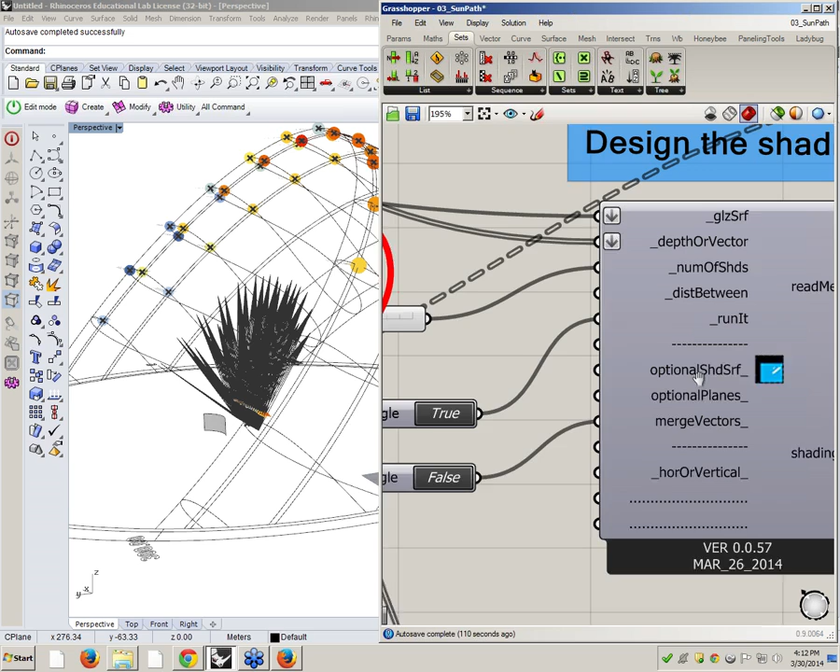So can you see the input for optional plane? Optional planes - similar to what I did with an optional shading surface, you can generate a plane and put it inside. So let's do it for you.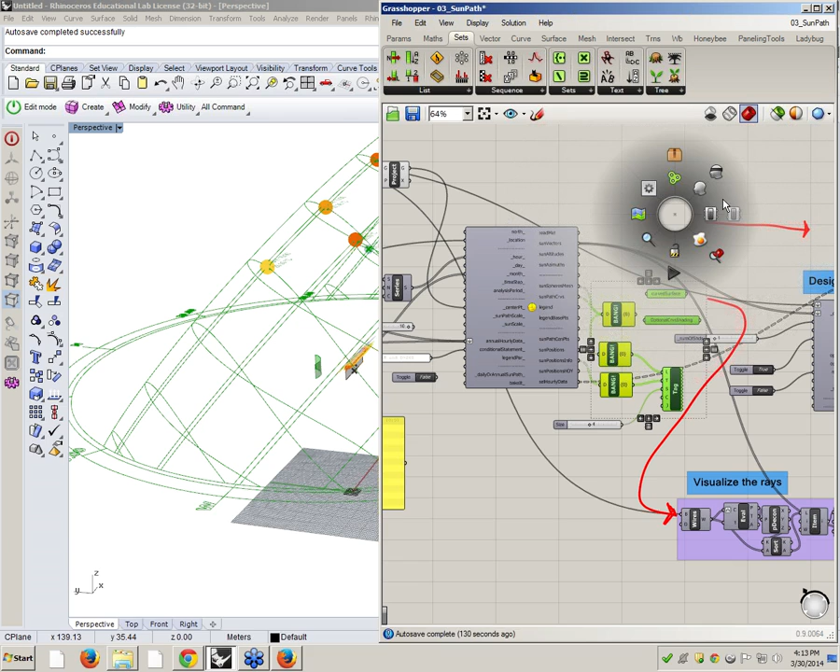So do you remember that I had the center point of my - so the first thing I do, I go preview off this, and preview off my sun path. I'll bang things, preview off. Let's just watch this. Okay, so the question is, we have the shading up here - what if she wants to bring it down here? What if you want to design a light shelf? Right, this kind of stuff.

So for now, I just use the center point to bring it in the middle, but definitely there are ways, as I showed you, to find the right place for the plane. So I use this point to generate a plane.

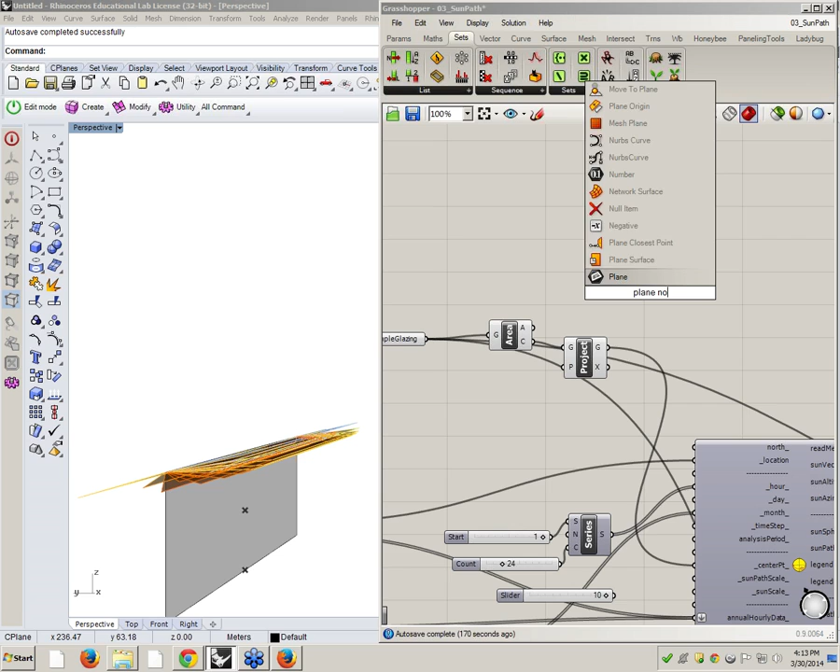How to generate the plane is, if I type plane, there is a plane by normal component, plane normal. What you need here to generate a plane is the origin of the plane and the vector. The default vector is 0, 0, 1, which is the z vector, so it's fine. This is what I need. So I just use the center point here, connect it as the origin, and it gives me this plane.

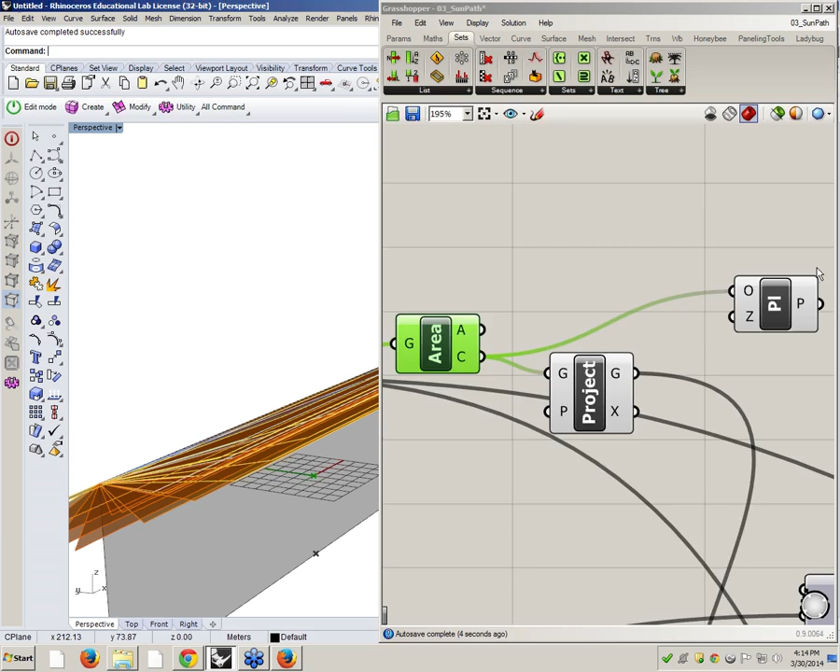Now if I use this plane and connect it to optional planes, it will design the shading on that plane. If you have multiple planes, it will be multiple. And why does it do it on both sides? I really don't know, probably because the point is just exactly on the surface.

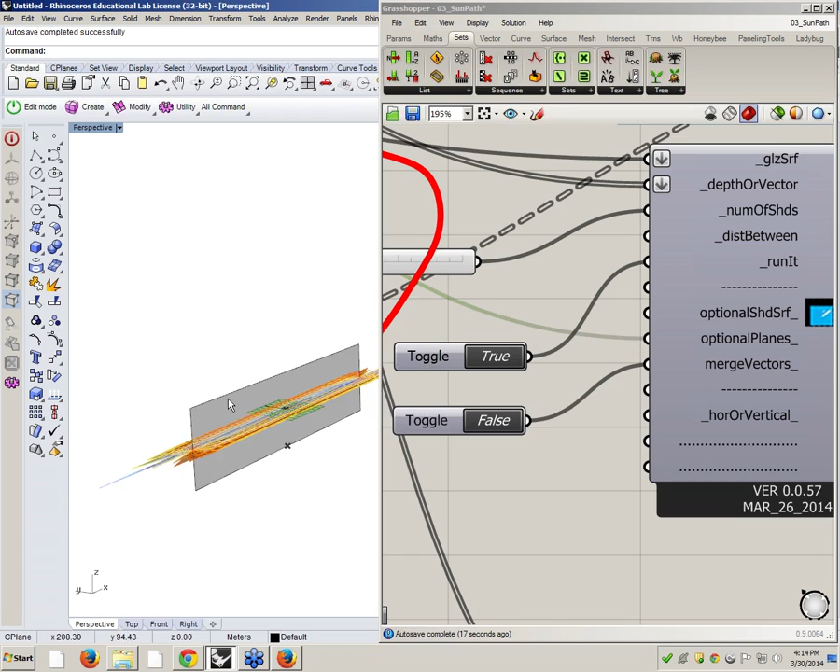It shouldn't, but now you can generate multiple planes, or you can start rotating the plane if you want a different angle. Or it gets more interesting if you have something curved, like this surface, and you want to design vertical shadings.

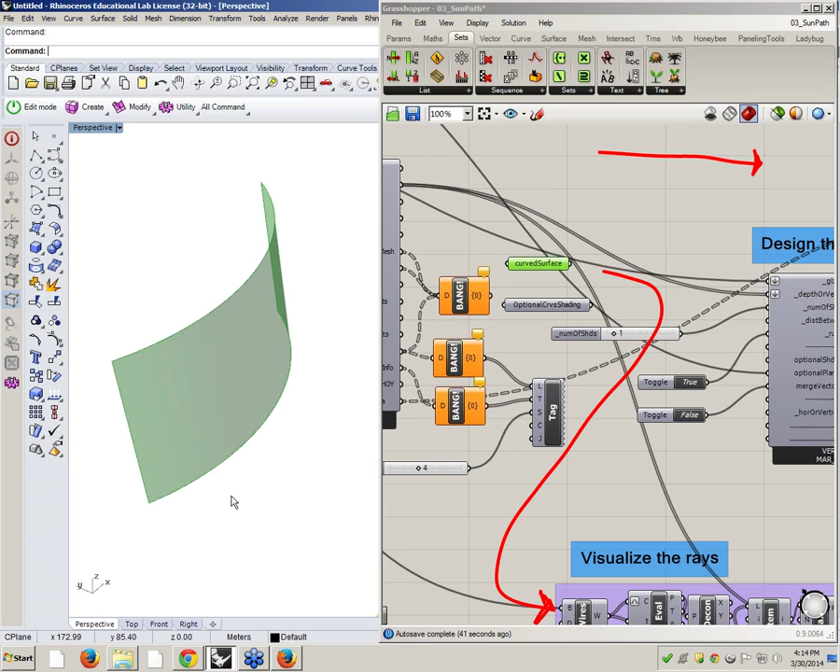So you can find the curve beneath here, and based on that, generate multiple planes. Do you want me to do that? Or should we go for the radiation analysis? Let me do this first if it's interesting, that's how I never get to the radiation analysis.

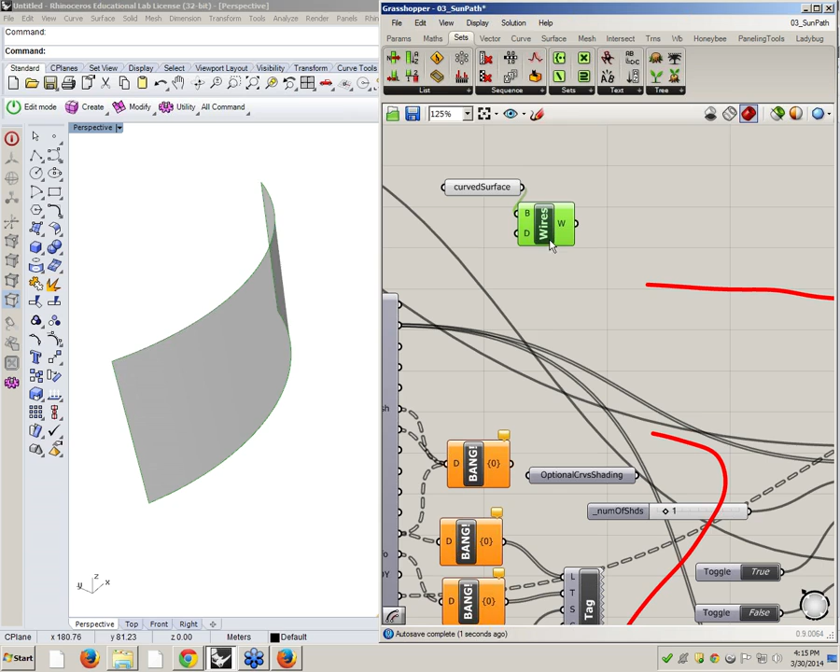So that's just normal - I have this surface, right? I can find the wires, and I want to find the bottom one here. The simple way I showed you is to select it by item. Not the best way, but for now it works.

So let's do it. I was lucky, item 0 was exactly what I wanted, so this is this curve. How do I know? I can see this thing is green, can you see it too? I can preview off this so you can see it better. This is all the wires, right? If I preview off this too, this is the selected wire.

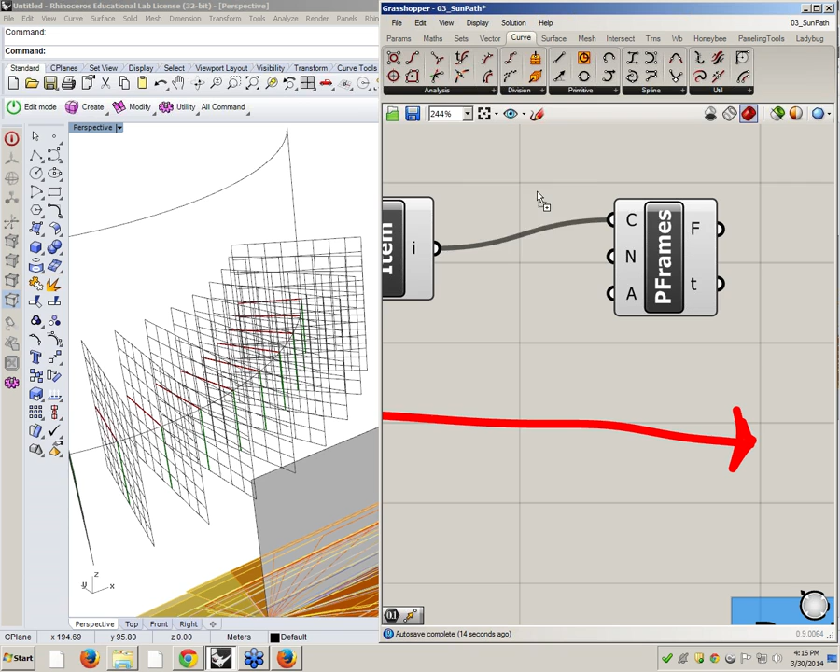Now I want to generate planes. There is a component that does that. If we got lucky, all the planes should be in the same direction - there kind of are. So what I did, do you remember the evaluate curve component that was giving multiple points, or divide curve, that you could connect a curve and it was generating the points?

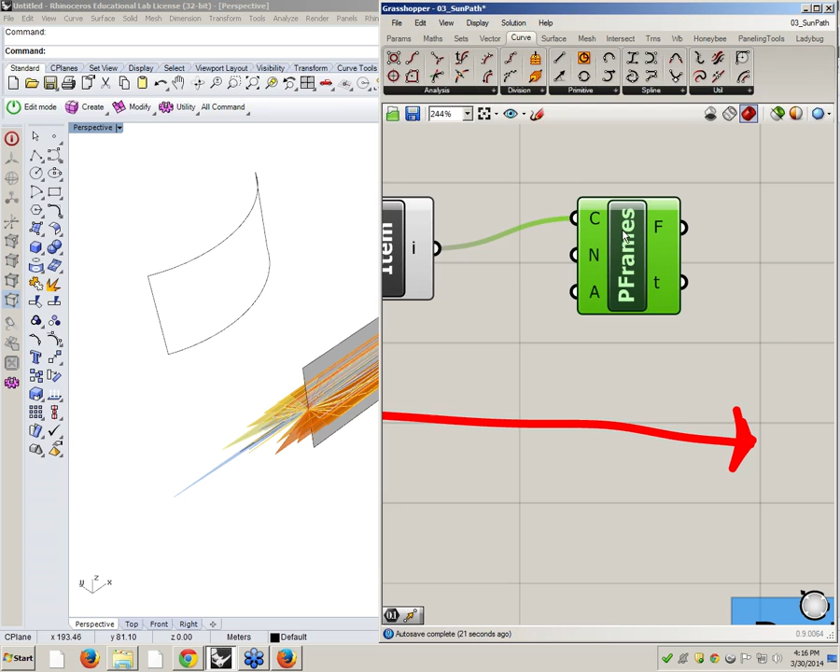So we used this component before. What it was doing, you connect a curve, and based on the number of divisions, it generates the points. This component does the same, similar thing, but this time it generates planes and not points. Now I have all these planes, so I can connect these planes to design the shadings. I connect this thing, because this is the surface that I want the shading designed on, and then I connect my frames and keep my fingers crossed.

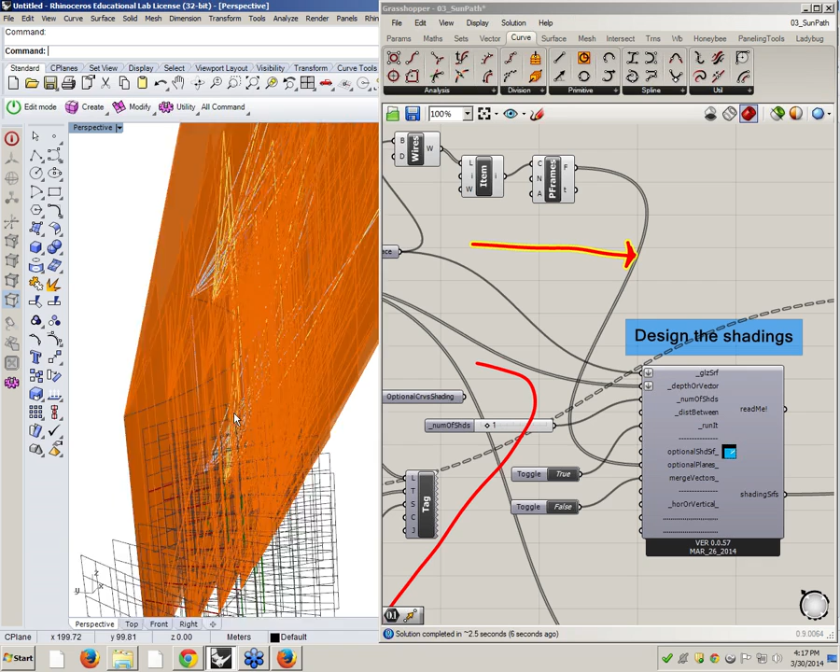Here you go. So now it designed all these vertical shadings for me for every single curve that I have. And now you can see, for example, when you have a sun vector coming kind of perpendicular to your window, you can't really block it, you know. This is probably something we can talk about.

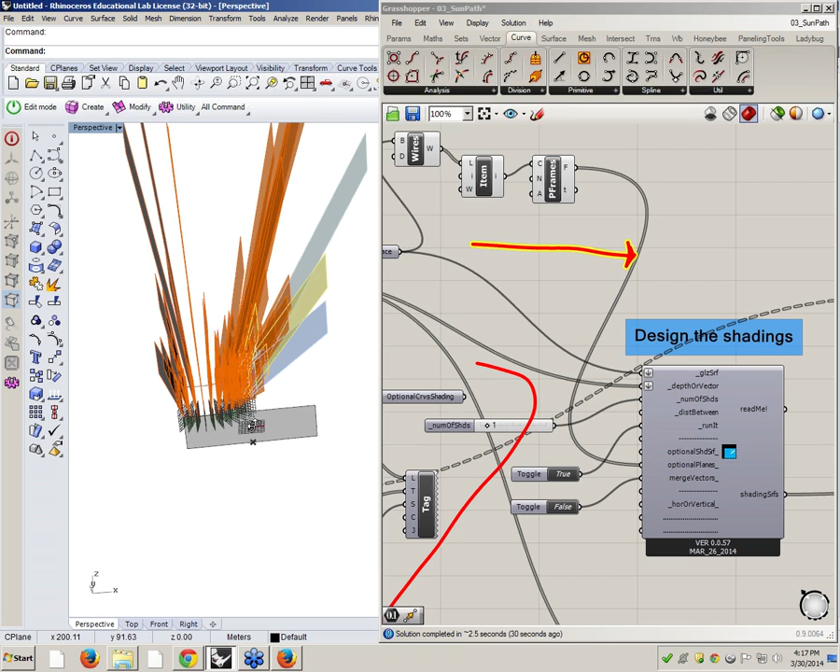Does it make sense? Okay, so this is how you can use all this. I mean, you can do way more. For example, if you want to understand which building is actually blocking your building, instead of optional geometry, put that building in, and it shows you what part of the building is shading your building. Does it make sense? Because that's what the shading is.

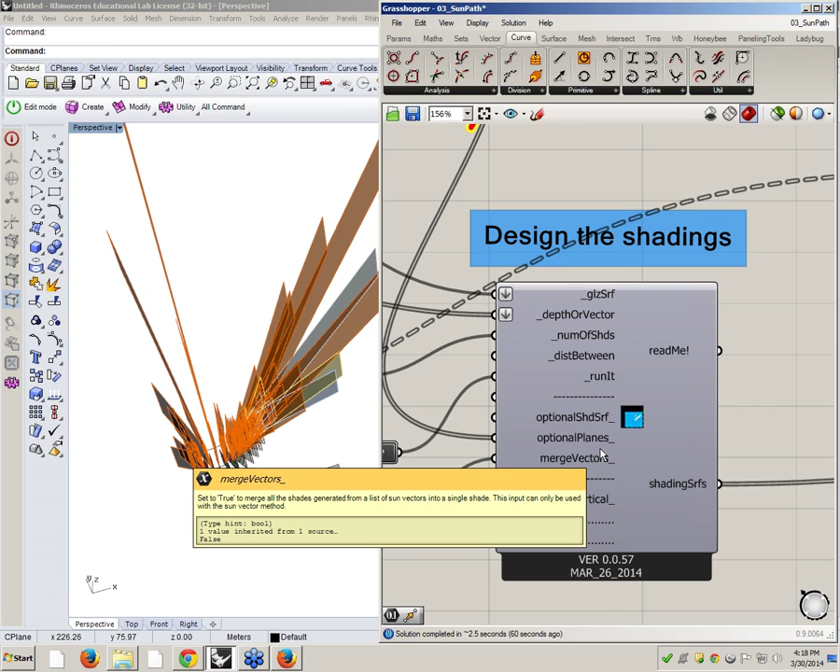If you want, I can have an optional surface, which could be a horizontal surface. The optional surface could be my residential building next to me, it will design that one for you. And based on what's happening here, actually, this is how we are doing this solar fan.

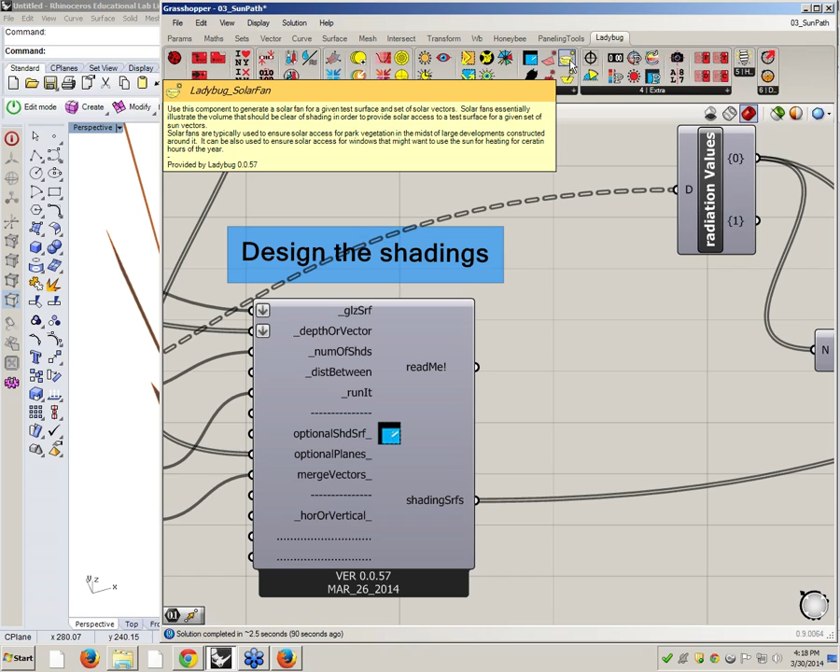You can easily figure out the components. You make mistakes like 10 times, the 11th time it works. But it's important to understand what's happening.